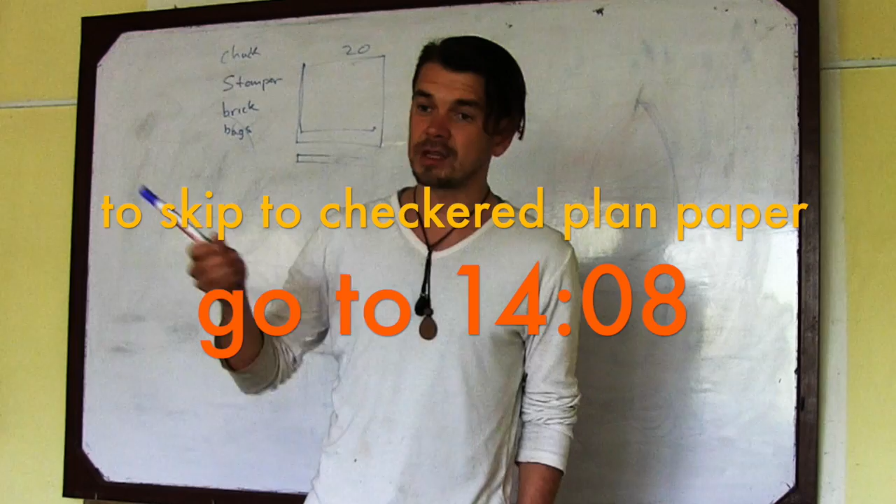So we're going to do some improvisation for the earthbag dome, which is going to have, so this is a front view, or the window, the round big window. It's 1.2 meter diameter. We're going to make it out of ferrocement. So it's going to be a cylinder.

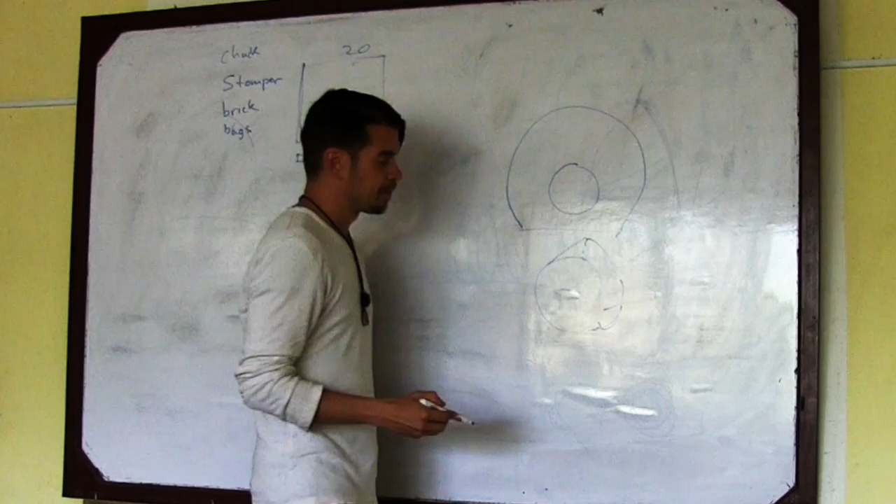Basically, we need to get mesh, and I'm going to draw the exact what I need, and let's see what we can find. So it's a mesh with squares of about, yeah, it comes in a huge size, probably the size of this wall. So if we could get one of those pieces, the thickness of this is about 5 millimeters, but I'm happy with what you can find.

The key message here is that we're able to make a circle out of it. So about 60 centimeters, and you'll use the rest of the offcuts. Once you learn ferrocement, you can.

Just hang on one moment. This big piece to bring here. Maybe they can cut it. It's very light, I think. No, it's not heavy, 2 people. It's big, but 2 people.

But it might be better to cut it into 2 pieces. Would that be enough? So what I need is a 60 centimeter piece by 4 meters. This is what I need for this job.

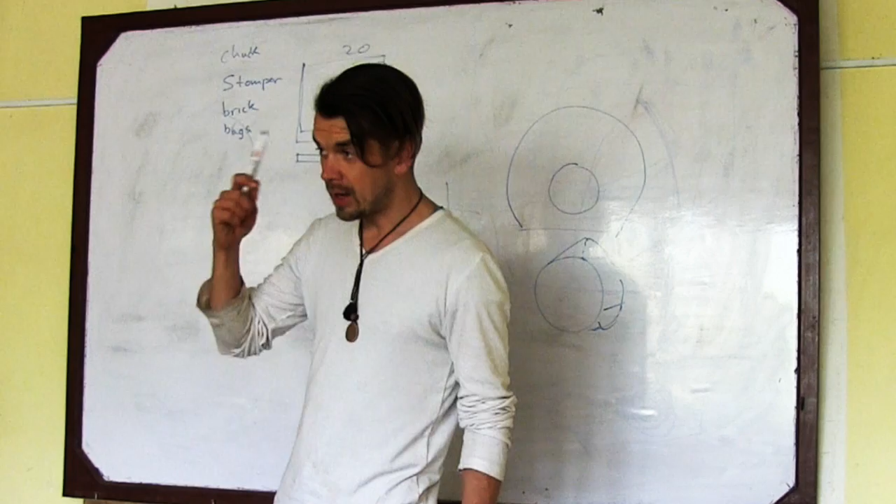But if we plan it carefully, let me tell you why. So squares could be a little bit smaller, but it's not a small thing. It's the one that you drop into the floor to make the floor not crack. So you have plenty. Your metal work is exceptional just from driving past and seeing how people are building. It's a stock standard material.

So we're going to take this mesh, we're going to make it into a circle, then we're going to take your small squares from your drying boards apart, if that's what you want to do, otherwise we need to buy it. I think those trays are great. I would recommend not taking them apart, but if you're not using them, let's take them apart. But those trays are great. That's your dehydrator, but you know what you need.

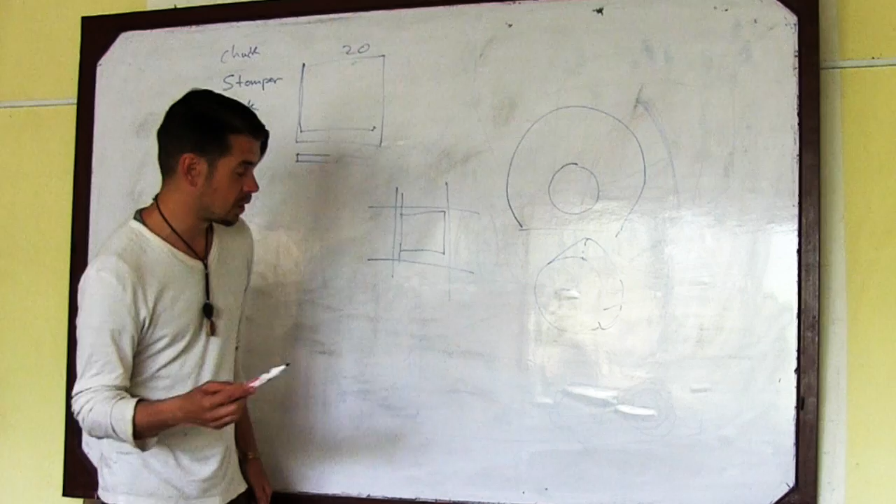But I need that other mesh as well, so we're going to flatten it, because it's 1.2 meter diameter times 3.14 pi, which gives us 3.7. So we need an overlap, probably like half a meter overlap. So 4.2 by... and you always wonder how wide.

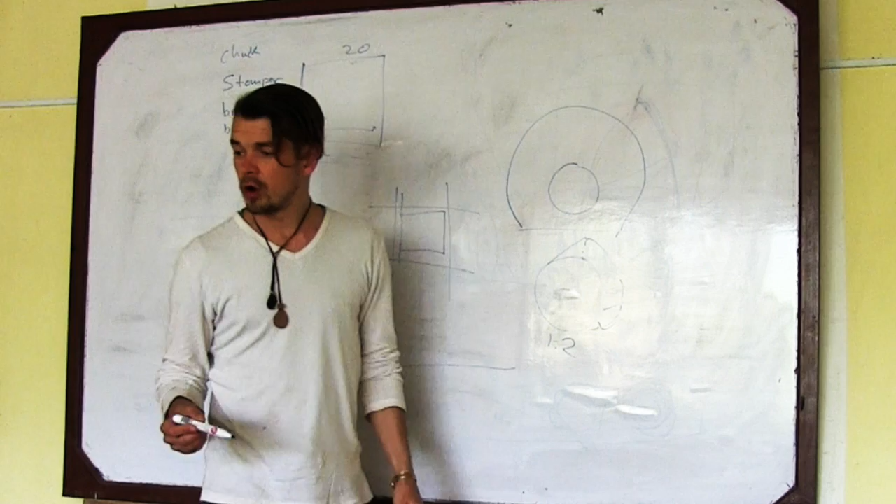The key message here is that we don't have this because we have the brick line. The key message is that we don't have this thing stopping there. We need this thing to go a little bit out here and out there. So I think it will be fine, but we need to check on checkered paper, which we'll do just now. But 60 should be good.

You can line it. I don't know if you've seen those Thailand dome pictures, the orange dome pictures. The guy's lying in the window. Steve Areen, yeah, he's lying in that window playing a guitar. It's a very cool feature.

Okay, so we're going to take it flat, that mesh. Then we're going to take your small mesh, the 1 centimeter. We're going to put it here, and another one on the outside. And we're going to stitch it with lots of little wires.

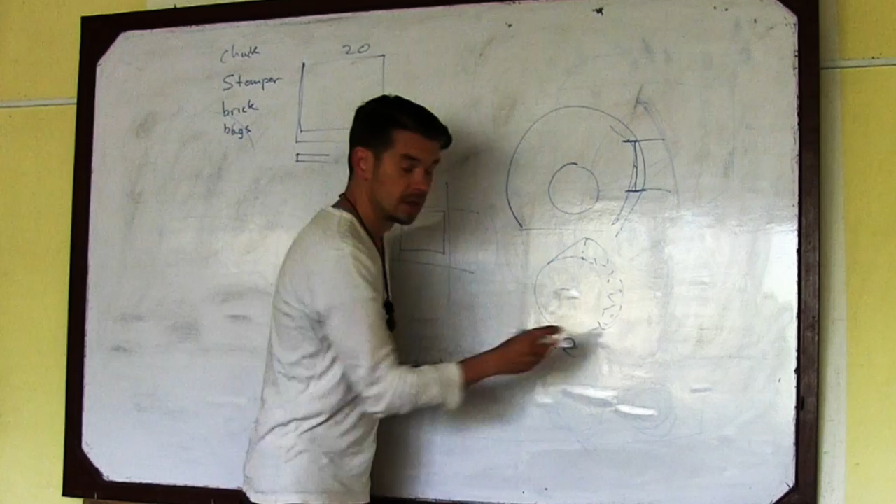Tie wires, so pliers, tie wire. So 2 millimeter tie wire, your standard tie wire. Not thin, and not thick like your barbed wire. No, nice tie wire. Okay.

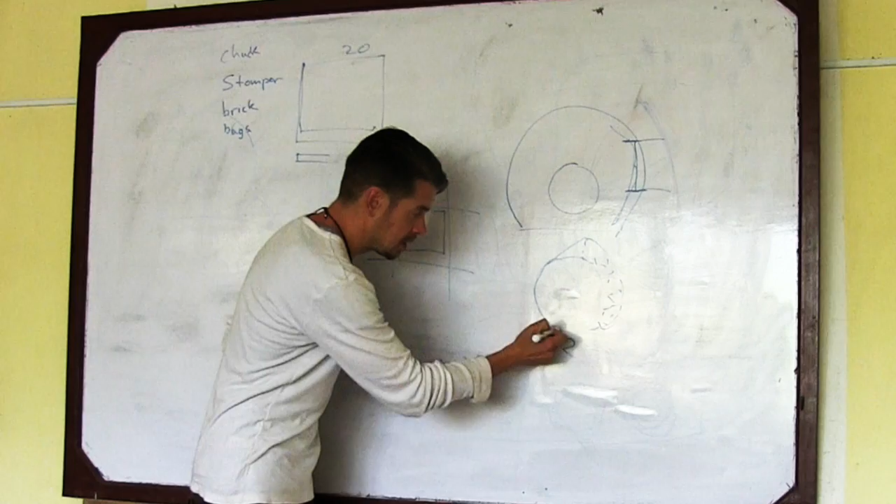So we'll stitch it all over, and we'll bend it in a circle, and then we're going to use your rebar, which I identified you have a pile of. There's a rebar that's not thick, but it's just almost thinner than my pinky a little bit. It's lying there. So we're going to use that as a ring here, and on the back side we're going to use it as well. So side view would be rebar.

And then this mesh. So we'll bend the mesh, and then we'll just reinforce it with rebar. And then what came to me yesterday by the river is we just have like 3 tie wires just to give it bracing, so that thing doesn't, because you're finding like the forms are going forward and back, forward and back.

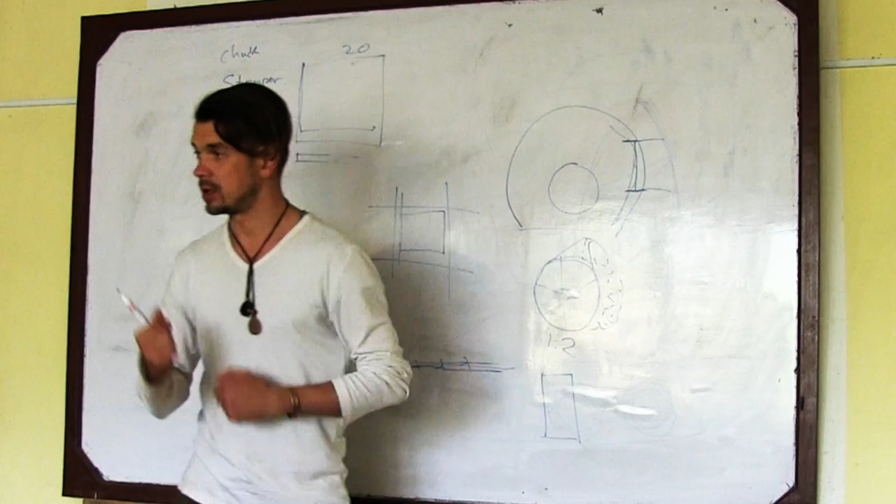As soon as we put the plywood, it's like sturdy. So this bracing is going to help it not go into an oval, not to flop. It will go like, because the wire doesn't let it go. So that will allow us then to plaster it with our plastering skills.

We have a professional plasterer. So we'll all go at it and make a nice strong mix, like 1 to 2, 1 part cement, 2 sand, and it'll be a ferro cement mix. Nice ferro cement mix. So if all goes well, which it should, in 3 days time, this thing will be like, it will be a rock.

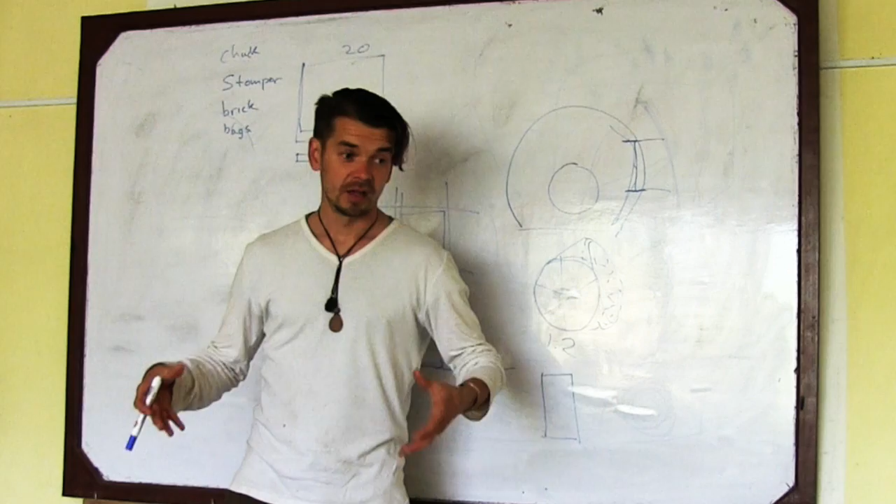We're going to gently pick it up with 4 or 5 people, and we're going to place it in the brick line. There's going to be our bricks.

We're going to take a saw and cut it out here, then put some bricks. We need some concrete blocks or something lying around to support this. Let me show you the side view. Say that's our dome - we're going to put something here, and rest this cylinder on that, because it can't stand on aircrete by itself until the aircrete is fully completed.

We'll do that with cloth and everything, but we'll come across that when we do it. I'd like to build that today, and plaster it today. So whenever it arrives, let's take a trip to the shop.

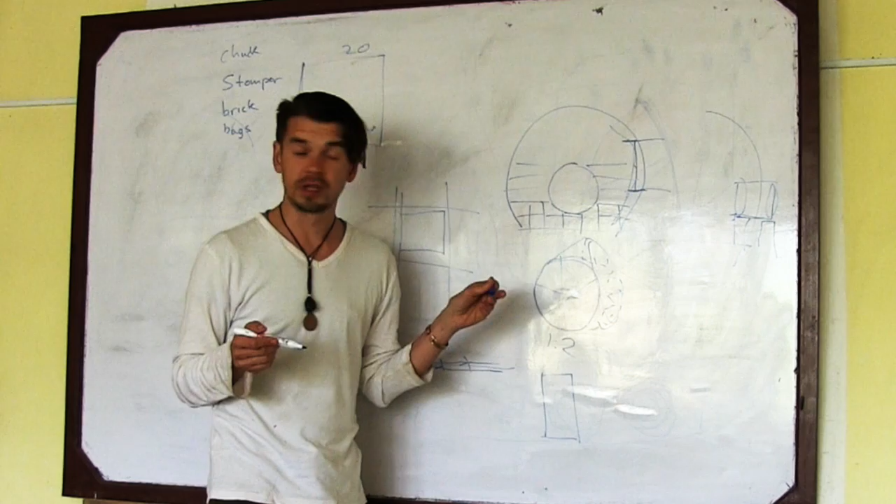Something else occurred to me - we have a tunnel here, and we have an aircrete dome, a sandbag dome here. It occurred to me that we shouldn't make this one form, because it's just so big and it's going to use so much wood. But we do need a form - we need a form here, and we need a form here.

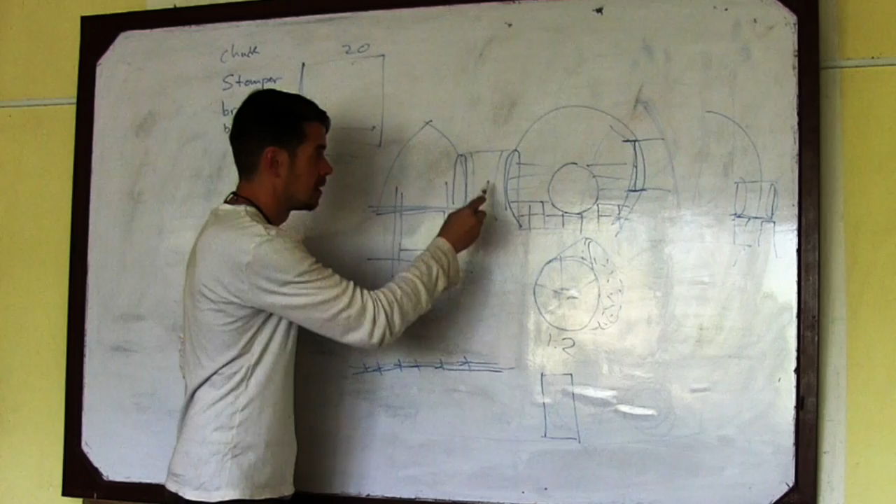So when we build our aircrete and the sandbag, we go around this form. The form can stop here, and we don't have to have it in the middle, but we definitely need to have it where the domes get a door cut through. So that means more plywood.

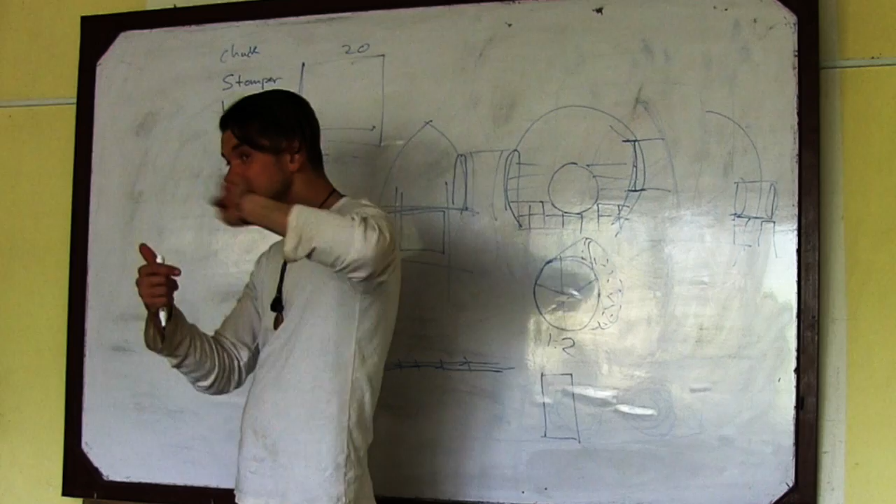What size? We need another 4 boards, and we need some rotten wood that we've been recycling. Can you get that wood in the shop? Like 5 by 2 centimeters. How much? In total, how much? We'll need to just plan it - we'll draw it quickly on checkered paper and plan it.

There's more wood from the light wood, from the forms you used yesterday. There's more in the tool shed. Okay, let's have a look. Yeah, that could work - different size, I think that's better. It's more like the termite-eaten wood that you used.

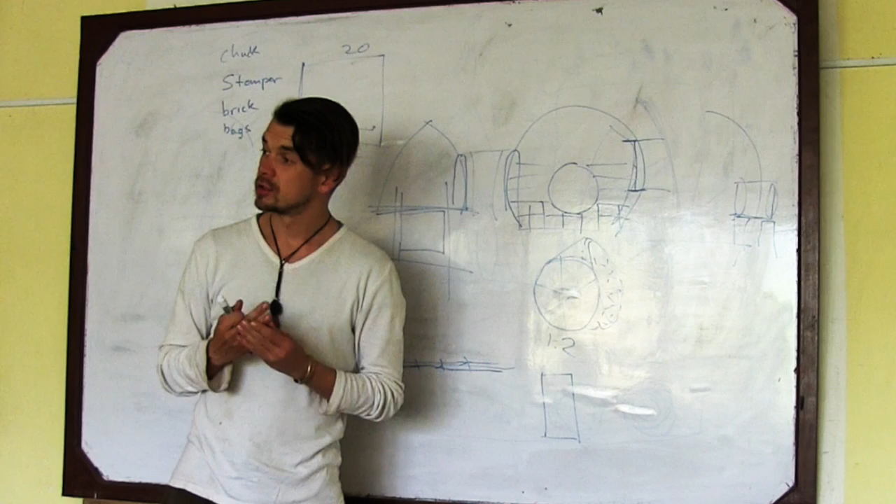Okay, and also did you check the reinforcement material once - the white fabric stuff? Did you check it? No, I haven't yet. Please, let's do it today, let's do it right now, after the... Okay.

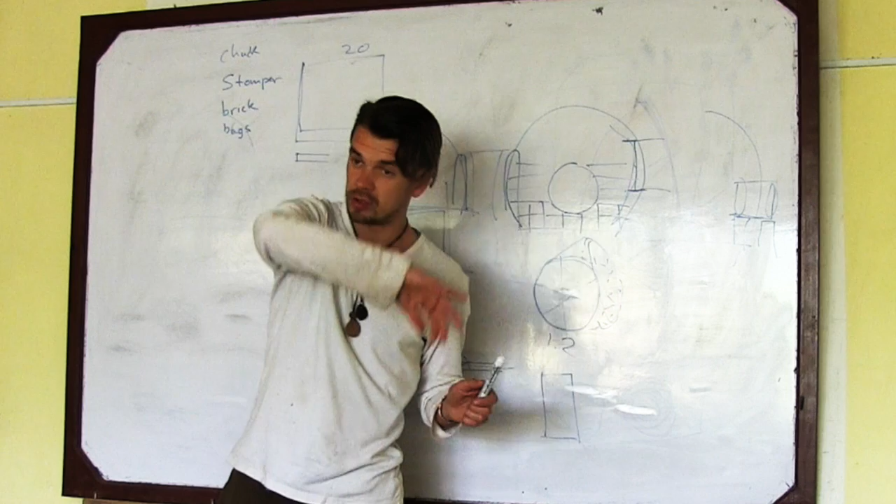So basically, once we get these 2 forms and the window, we have all the forms we need except for our big arch. There's 2 choices we can go with for the arch - the bender choice, with the plywood here and there, and beams between the 2 bends, or we can make it again with ferro cement. But what's our story on the bender?

We're waiting for the chuck to come. Just the chuck. Yeah, good. And we pray to the Lord that the chuck opens wide enough to take the bender stick. The Lord is big, and the chuck will be big. Okay.

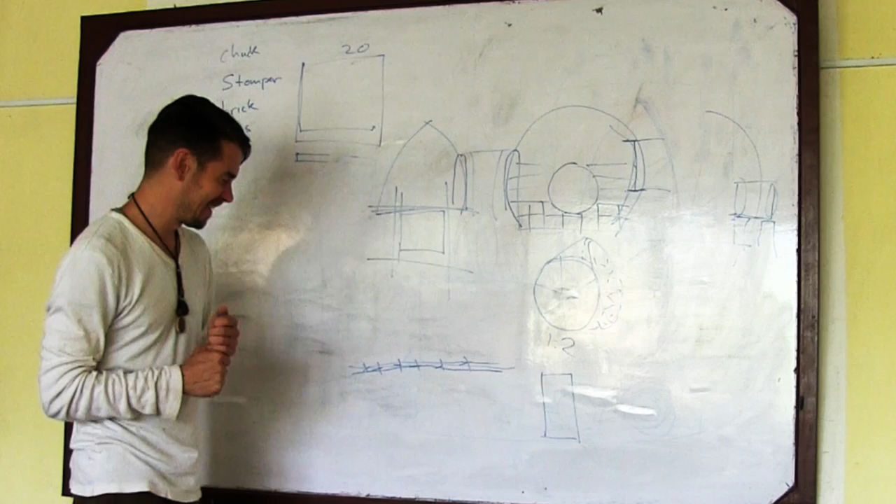Alright, so then it just leaves us with one form - this one. So we do 1, 2, 3 if possible today. Whoever hasn't had a chance at building forms can give it a bash, so we can rotate. We made a really nice form yesterday. And the rest of the stuff I can brief you on site.

So the question is, why can't we take a 3-meter dome and bash a huge door in it? As you can see, that's just unproportionately incorrect, so you've got to feel it out. The 3-meter dome, the windows are not going to be bigger than this.

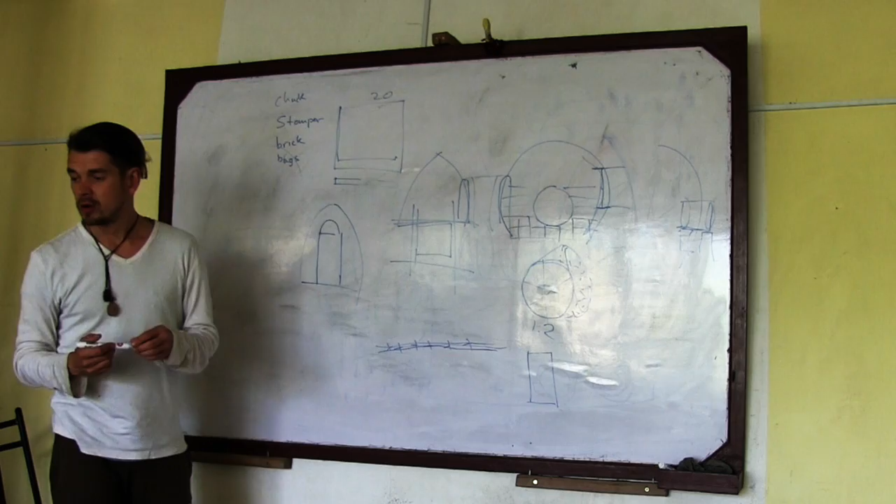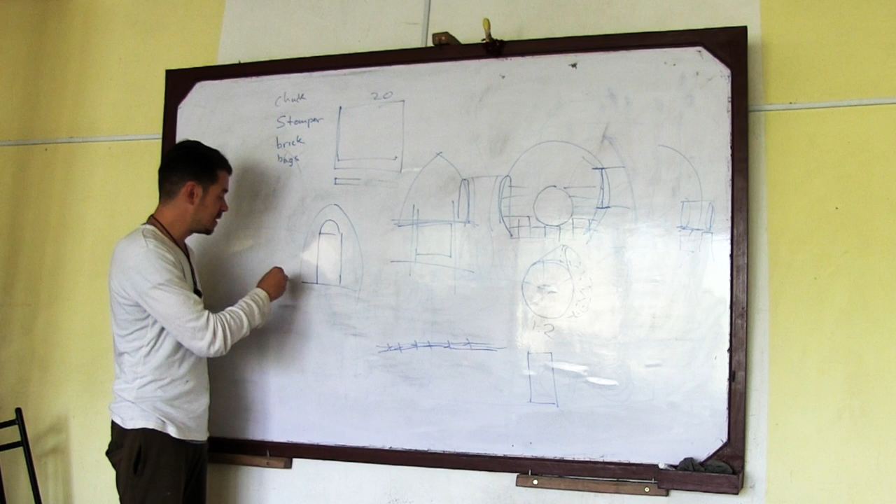I'm even worried a bit about the huge frame we made there, because by the time we put the side sticks and applied it, it came out too big. But we'll make it work, even if we have to make it smaller, or use it in an aircrete dome for example. But if you have a 5-meter dome, which is 5 meters high, then doing a door this size is more proportionate - that works.

With aircrete we can get away with huge openings, because the brick is so light. The sandbags are very heavy - you saw, like 3 buckets, you can't lift it. That dome is going to use 1,000 buckets, it's just too heavy. So that's why we've got these sturdy, smaller window frames.

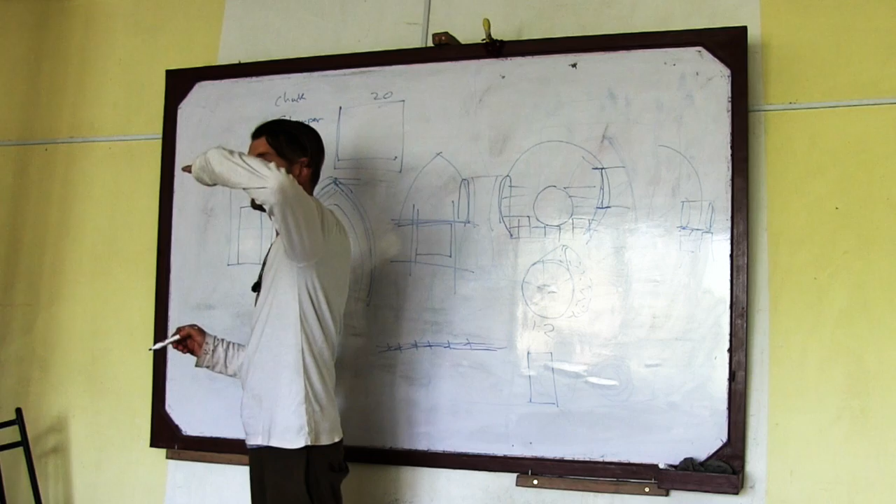In terms of the plywood, why I said 4, because it comes in 2.4 meters. So we'll be able to cut this shape, which is going to be 1.8 by 80. So if it's 80, then it's 40 high, the radius. So this part will be 40. So if it's 40, we want the door 1.9, so Frank can get in. Minus 40 is 1.5, so this is going to be 1.5. So it will take 2 meters of board.

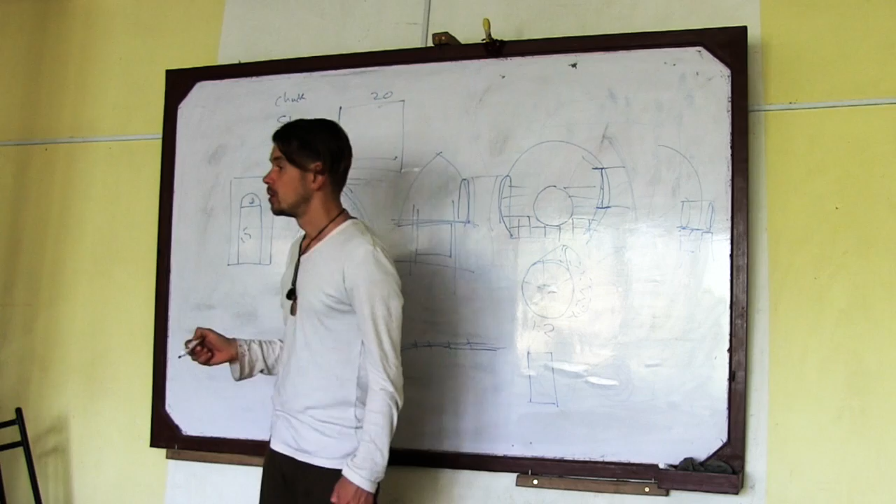And that 4 times. I think your boards are 2 meters, or what are they? They're all that size that I brought the day before. I think they were at 180. 180, yesterday you brought.

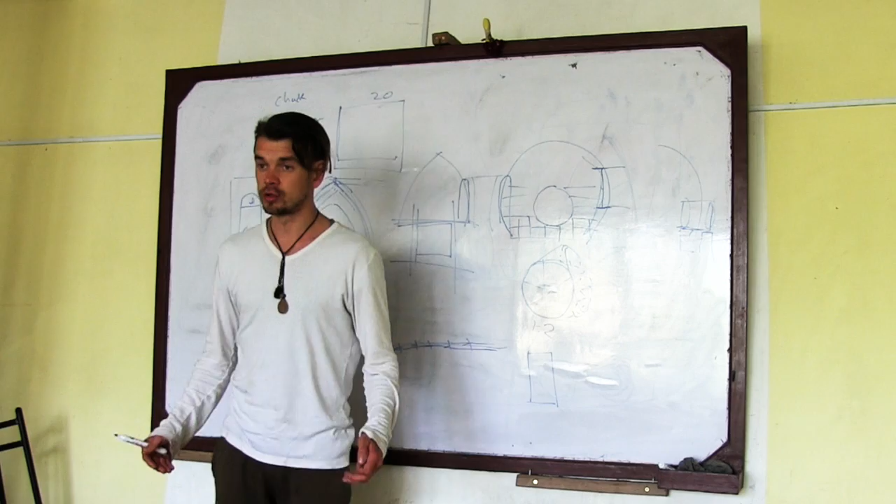If we got 180, we'll make it work. It's just Frank's height, but if we want to make it slightly higher, we put 4 bricks underneath, which we will anyway, because the way to take these forms out, you put bricks and wedges, and you kick the bricks out, and the form goes, otherwise there's all the pressure on the bag on top of it. So we need to check that we have enough thin plywood, and we need times 4 for this.

And that thickness of this, like the one I brought before? Or can that also be thin? Look, that 4 pieces, what Cara got us is amazing, if you want your forms to last. Yeah, but that is very heavy. Like that one I carried was half that size and super heavy from side to side.

And we need 4 people to carry them. And we need the mesh, so we need 6 people to go there and bring it. Wow, yes, that's it. It should be stable, of course, but I think then it's better we go to Domre again and buy it like you did yesterday. And then you have to understand that's a big issue for us, you know.

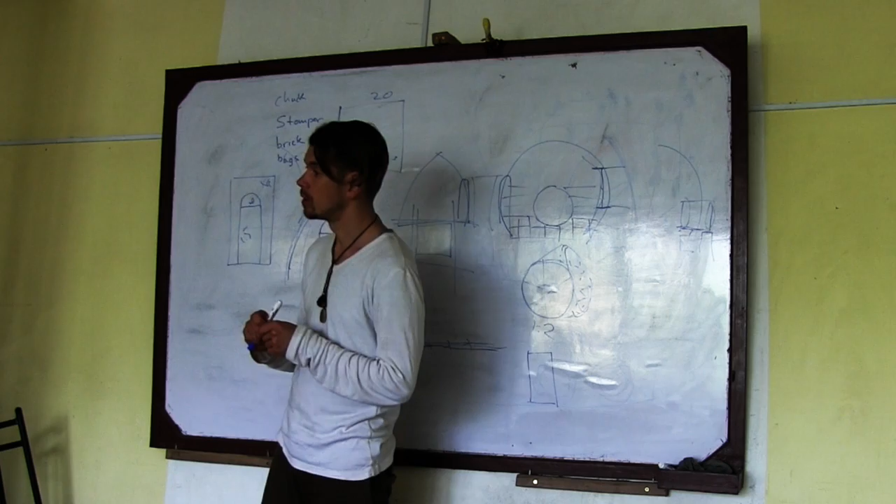Like yesterday we could get them also in one go. Now we have to drive again to Domre, have another Jeep, costs us 3,000 rupees. It's okay for now, but plan a little bit, so if we need more, we take everything today from Domre. Because we again have a Jeep, we can load it, but we need to plan this a little bit better. It's half-day work, it's a lot of rupees, so... Yeah, I hear you.

This is the thinking. When I was designing the bottom 2 rows, I was designing it for 2 curves made out of steel bend, so I wasn't concerned about sizes, and that's why I've placed them at 252. Because our bender and that whole story hasn't happened yet, we're realizing that we're going to be making the box out of plywood, very similar to the style with these beams. So it's going to be a heavy box.

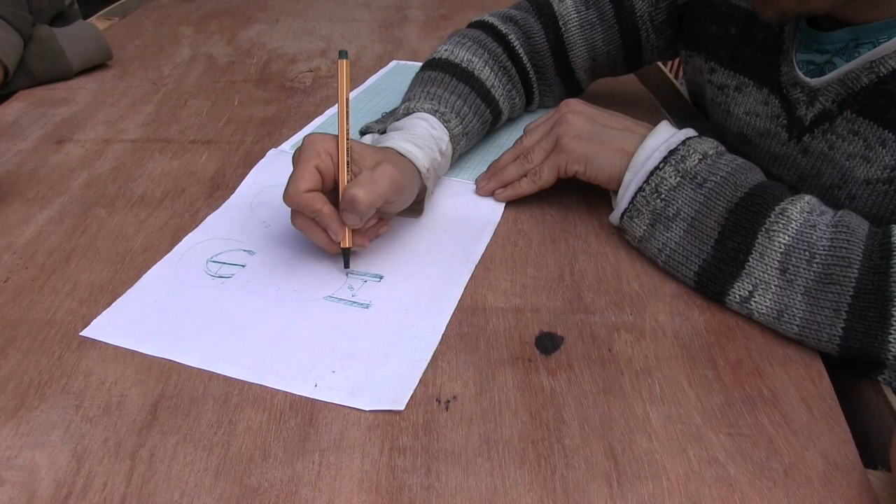So I'm recommending, and I'll leave it for you guys to discuss quickly whilst I run and get a compass, to build 2 extra bags, one here and one here, a bit closer. I know it's double work, but then we're able to use just the plywood, 2.4, it's 123. You know, worth having a little curve for a human being to enjoy a cup of tea.

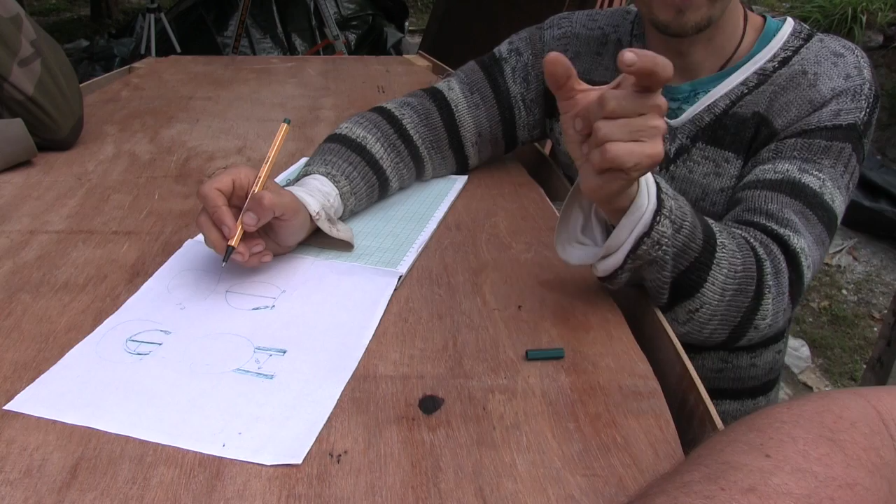To build these 2 little bags that we can just have these plywoods, and we'll still have a little wooden beam in between the 2, because there'll be 2 separate forms. We'll still have a little wooden beam this size between the 2 that we can kick out. The forms come in, we'll kick out the wedges, so the forms drop down. They come in and drop down by 3.5 centimeters, which should be enough for it to be smaller, and we just can take them out more easily, yeah, because this stuff is heavy.

And then aircrete bricks are going to do that on the outside. First we're going to oil them with oil, some sunflower oil, then we're going to put the cloth, geotextile.

Okay, so just decide that. I'll quickly run and get a compass and a ruler, and we can do a proper design thing for this house and do it together. Okay, so we can switch recording.

Okay, so guys, the first thing to decide is the scale. We want to go as big as we can on paper, but keep it manageable, maybe let's try 1 to 2.

So we've got a 4.2 meter dome, inside foundation. So it's 4.7 full. Plus we have a 1.6 tunnel. Plus we have a 3 meter inside, so 3.5 sandbag dome. So we've got 3.5 plus 1.6, 5.1 plus 4.7 is 9.8.

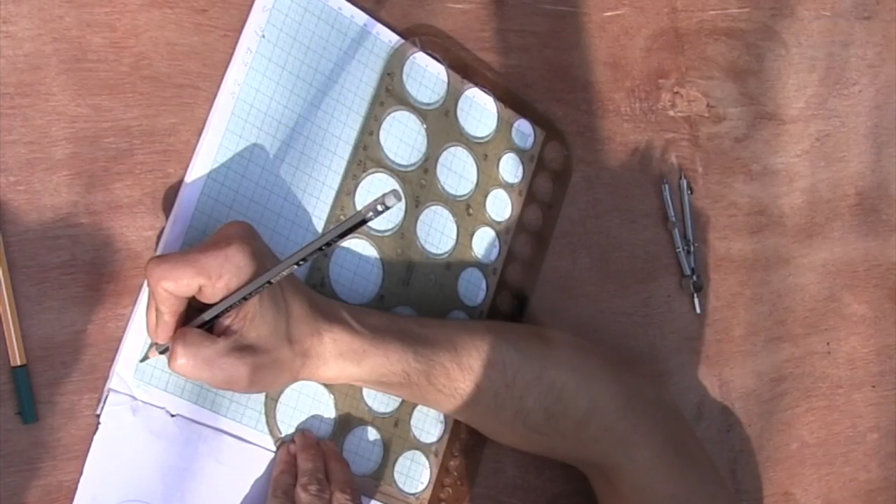The question is, do we go 9.8 and make that same tiny little thing I did the other day, or do we double it? On this paper we can't double it because it's 20. Okay, so then you draw the scale on the side: 2 blocks equals 1 meter. Okay, now we draw it up.

So when you're drawing it up, you want to be able to, if all goes well, draw full foundation circles here and draw a side view here, right on the same paper. Why not start with the side view? We can, good idea, because it's straight.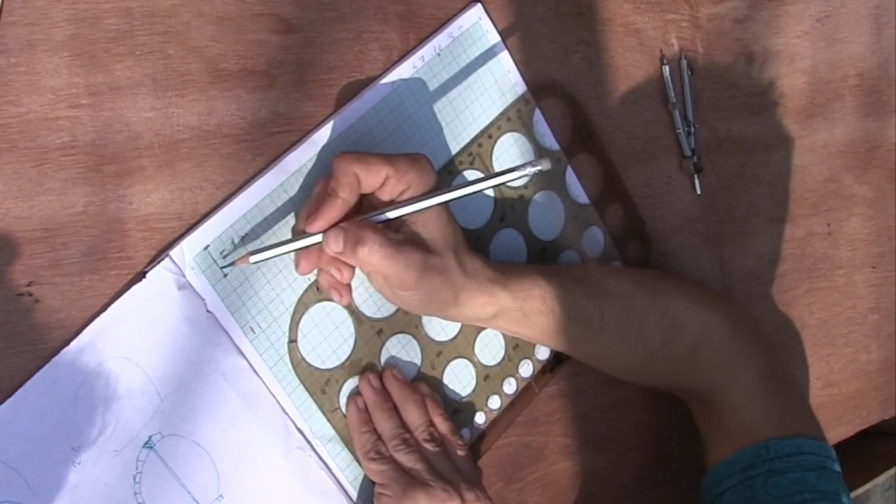So let's first draw the lines. We have a 4.2, plus the bag is 25 centimeters, so it's half a meter. So that's our bag. 1, 2, 3, 4, 4.2 plus another 5 millimeters for the bag. Does everybody understand why 5 millimeters is the bag? This is 1 meter, this is half a meter, this is 25 centimeters. Okay, so that's our concrete dome.

Then we've got a 1.6 meter tunnel, so it's 3.2. Does it make sense? Yeah. Then we have a 3.5 meter dome with a 25, 4.2 meters.

Sorry, eraser. Oh, you got one. Got you. Well pointed. Okay, so double everything up. 4.2, so it's 8.4. Well spotted. Okay, then we've got 25 centimeter foundation.

Then we've got 25 centimeter foundation. Then we've got a 1.6 meter tunnel, which is 3.2. Then we have a 25 centimeter foundation. Frank, are you still with me? Mm-hmm. And then we have a 3.5 meter dome, which is 7. Now you have 7.5, sorry, 7. So we've got 7. And we have a half meter foundation.

Then we have a compass that's a certain distance away from foundation. Could you go and measure how far it is from the bag? You remember the stick that we stuck in that gives us the reference for the sandbag? The metal thing was a chain standing in the tunnel. Can you go and measure how far it is from the outside edge of the bag? Then we have a real life.

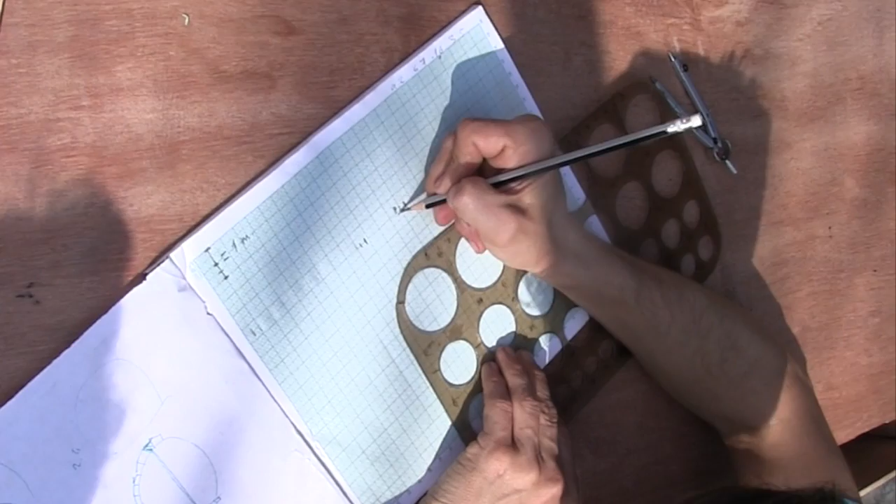How far is it from the sandbag, from the outside of the sandbag, this way. Do you want me to quickly run and check? Is this it, outside? Are you confused? So times 2, 30, so 6 millimeters.

Okay. All right, then we placed it a bit high. You remember we placed it a bit high, I think it's about 30 centimeters. Does everybody understand that that distance is where the house will go straight without curvature? The sandbag house, okay yeah, this is why.

And that's another thing we need to check, the compass is coming apart. German quality, it's definitely German quality. Helix.

Then it's working. Okay, so I'm going to just drop down everything a little bit. Okay, so that's the curve of the dome.

6 millimeters from the outside of the bag, I gotta do the same thing. Does it make sense? What I do here is what I do here. So there is 6. Let me just drop a line of where I started. So 6 millimeters to the foundation, yeah? Got that. Got it.

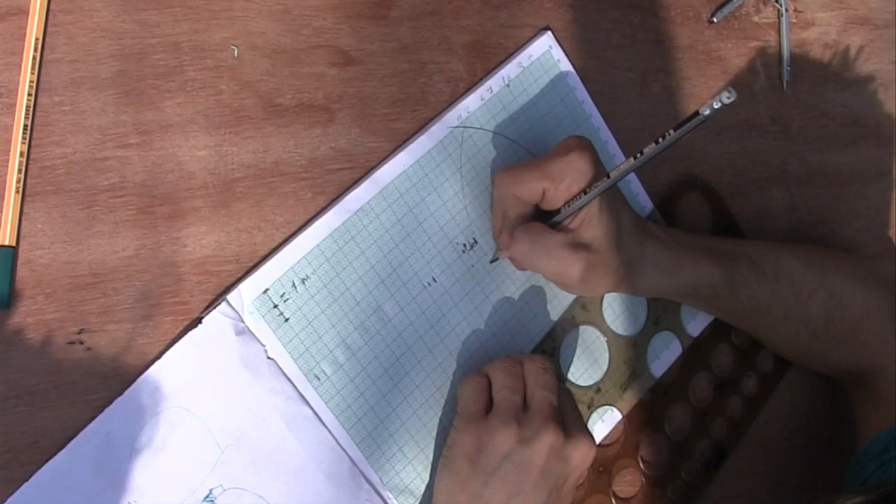Then we've got 6 millimeters going straight down. So this distance is where the bag is coming up straight. 6 millimeters straight down. And this is important design work, just because you were wondering, you didn't know how to draw floor plans. This is it.

Okay, then we have the thickness of the bag, so we can freehand here. You can use a compass, but just for the sake of time, I'm just going to freehand, more or less 5 millimeters. Is everybody still with me? Yeah, I'm here. Are you getting it? He's all over it. Okay, then we've got a thing going here, so straight up, and then it starts curving.

And this is when you plan your skylights and windows and all the story. So this is what we're gonna have as a house. So this is our floor.

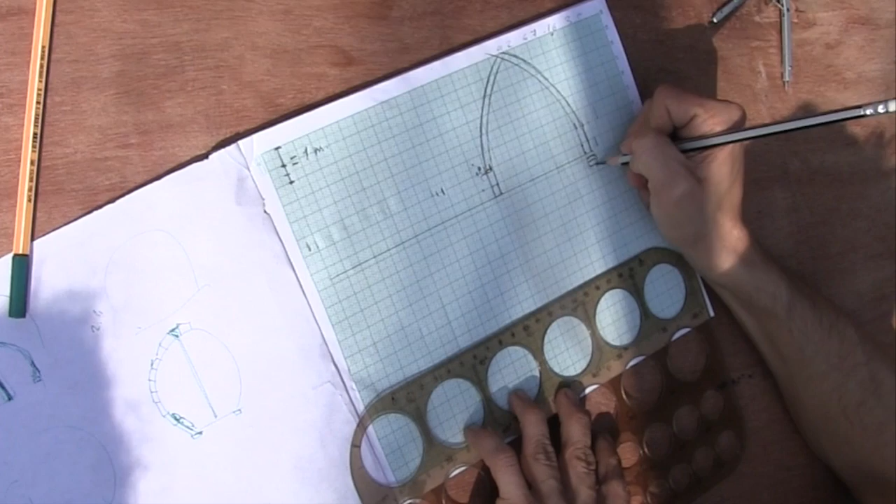And obviously the foundation goes below that level, which we still have a few rows of, I think three rows of sandbags. The bottom two bags get wrapped in plastic and overlapped here, and then this bag gets completely covered in plastic. It's all in the course, just a reminder. That stops any water from going up.

Okay, then we have our tunnel. We want it how high? 1.8 meters high. Are we comfortable that from the floor, like 1.8 is good? That means super tall people will need to lean in. Okay, so it's 3.6.

3.6 is our tunnel height. Why not making it bigger? We could do 2 meters, I think 2 meters makes sense, but it's huge. Okay, let's go with 1.9.

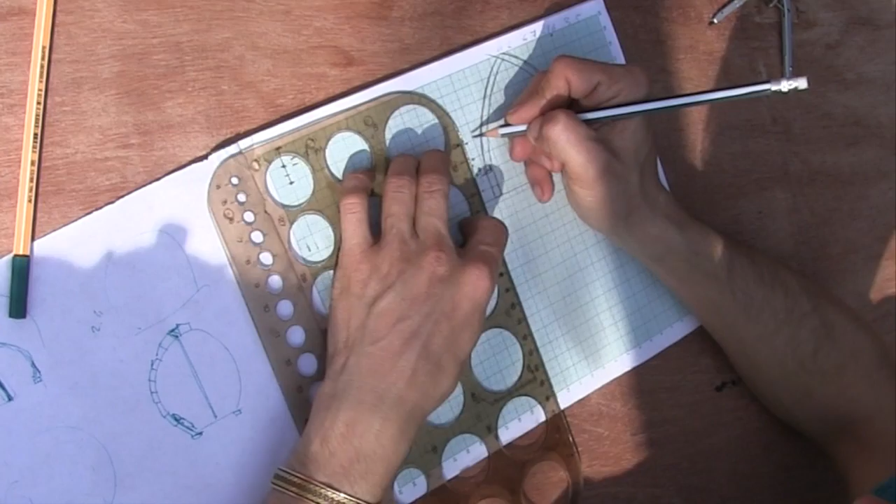3.8. There is a reason, I'm not just trying to be difficult. It's a very small dome. To make a huge door of 2 meters high for only a 3 meter dome... well, you don't really see the door, obviously, you're just running through from one to another. Okay, I'd make it 1.8. Let's just see what 1.8 looks like, and if we're still not happy with it, we can change it.

Okay, so 1.8 means 3.6 centimeters. Yes, everything is doubling, since we're on the scale, times by 2. 3.6. And why is this not 3.6? 3.6, there it is, okay.

Then let's draw the aircrete dome. The aircrete dome, we're gonna start at belly button level. Why not? A meter-ish, more or less. Frank, you might want to go to your belly button level if you're designing a home for you, but I'm assuming everybody is going to be as short as me.

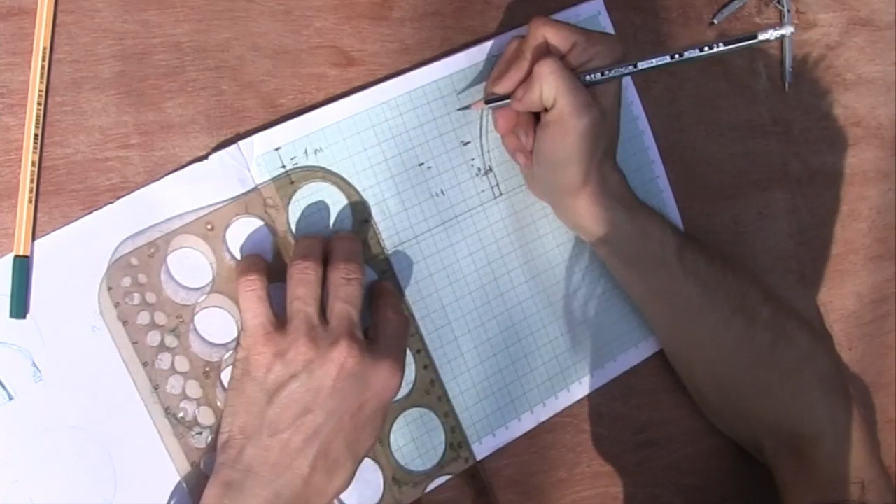Okay, so where's the center of this dome? The center of this dome would be between these two points. 2.1, 4.2 times 8.4 - 8.4, there it is. So 4.2 would be our center. Let's draw the center line.

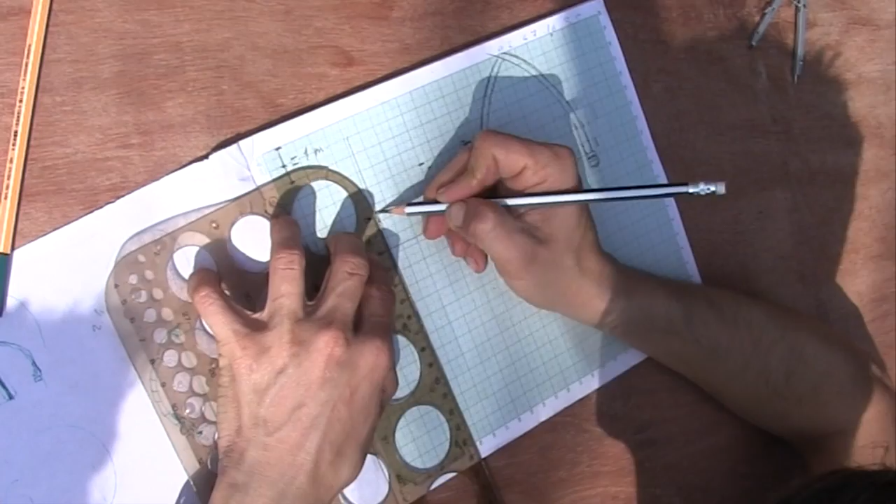Is this useful? Yeah, of course. Okay, this is our center, this is our 1 meter high. We're gonna draw the inside part of the foundation. This is not 1 meter - oh, this should be 2 meters. Look, there should be 2, so it's in the middle of this one. Yes, thank you, thank you - German quality. Okay.

4.2 is this line, we're still on it. So it's gonna puff out.

Okay, forget these two lines - these two lines are just showing us where the sandbag is. There it is, this is showing us where the sandbag is. We can still check where we're going to be placing it.

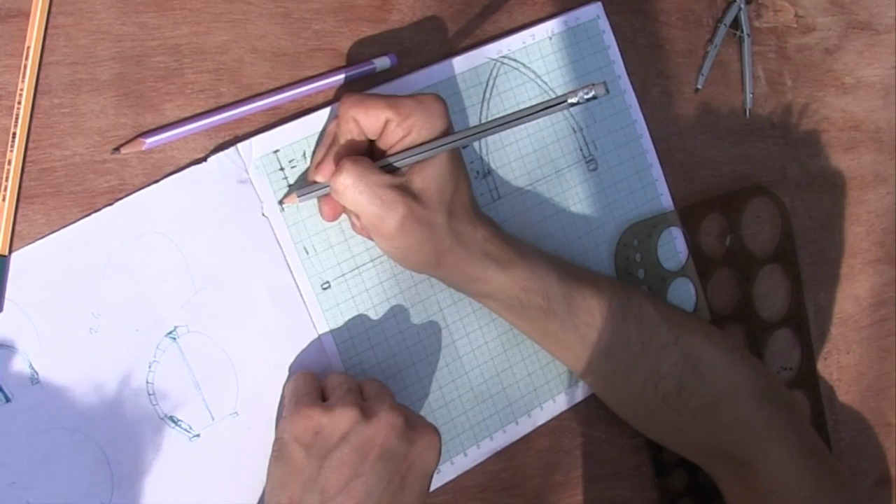The aircrete brick is 10 centimeters, meaning it's 2 millimeters on checkered paper. There's our aircrete brick, the thickness of it. Are we on the same page? Okay, so 2 millimeters, more or less, is our thickness of aircrete brick.

More or less, it's like, okay, so this is our aircrete dome. I mean, this one we need to recover. Yeah, so looking at already what I've drawn, it's slightly out, but what I'm trying to say is we're gonna place it more or less in the middle of the bag.

More or less, so it's probably gonna be slightly bigger, but the middle of the bag is where we start and we carry on from there. Boom, you know what I mean? Not too much on the edge, you can play a little bit. But also with these bricks, I think we can cut the last one so that it fits there.

We can, yeah, all the bricks we can cut. Not all the bricks, but yes. Okay, so this is the side view of our dome, and then we have a tunnel.

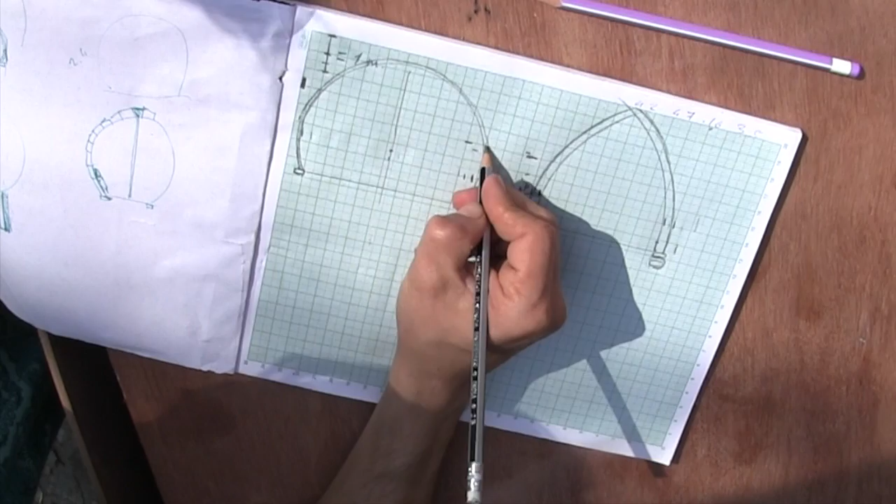And this is the box that we're planning right now, the two boxes we're planning right now. Let's draw the current front bags, this distance. Right now they're 2.5 meters, so they're 252 inside, 250 this way inside, and 250 that way, and they're 25 centimeters wide.

So our current bags are there - if you're standing in front of the house, oh sorry, and looking that way, yeah, so we've got the bag here.

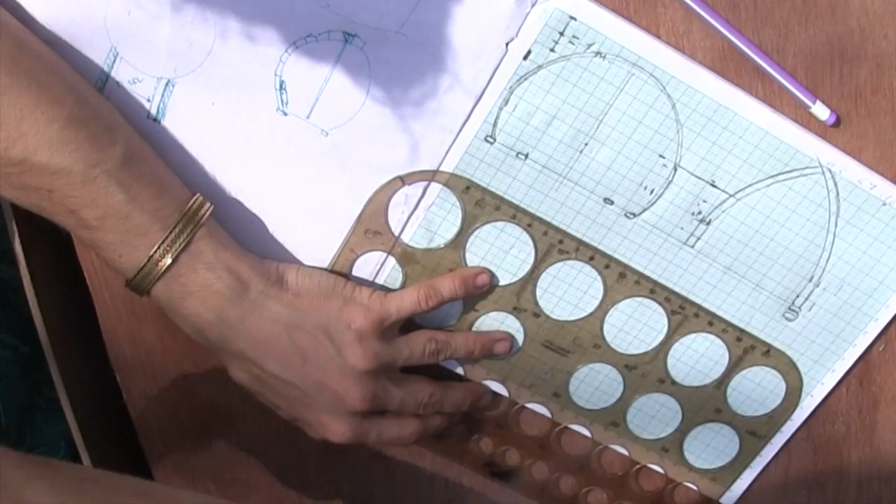Real life scenario, and you'd obviously do this before you plan your house, and then you're gonna have 10 times less problems. It's fine that we had problems, because if you hit these problems without me being here, you're not gonna know the answers. We're figuring it out together. So this is what we have right now - I'm recommending that we build another bag on the inside.

So we can use our 2.4 meter ply, let's just see. More or less, okay? Can we not just use this one here? Yeah, 1 meter high.

Okay, but the arch doesn't have to have the same geometry as the dome of 1 meter high. Yeah, this is good to know. Okay, the arch - what we really want to hit is we want to hit that.

But our wood is 2.4. Yes, but our wood is 152 high. Look, Frank, you don't need to do this. Sorry, 122. Our wood width is 122.

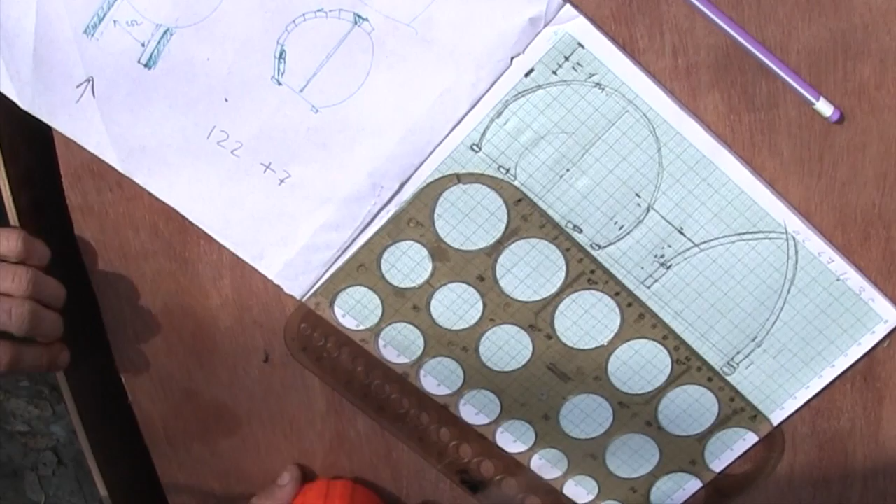Okay, centimeters. Plus, if we're going to be using these blocks, it's an extra 3.5 plus 3.5 is 7 centimeters because of these blocks. Yeah. Plus this wood itself, you know, the devil is in the details.

We are talking 130, yes, 5 millimeters, so it's plus another 1 centimeter. So we're talking 130, plus, if we're gonna be doing this wood block here in the middle, we're gonna add another 3.5.

133. So it's 2.6 - 2.6 is our limit, meters. So it's 2.6 here and 2.6 here is our limit that our wood allows us without making a whole box in the middle.

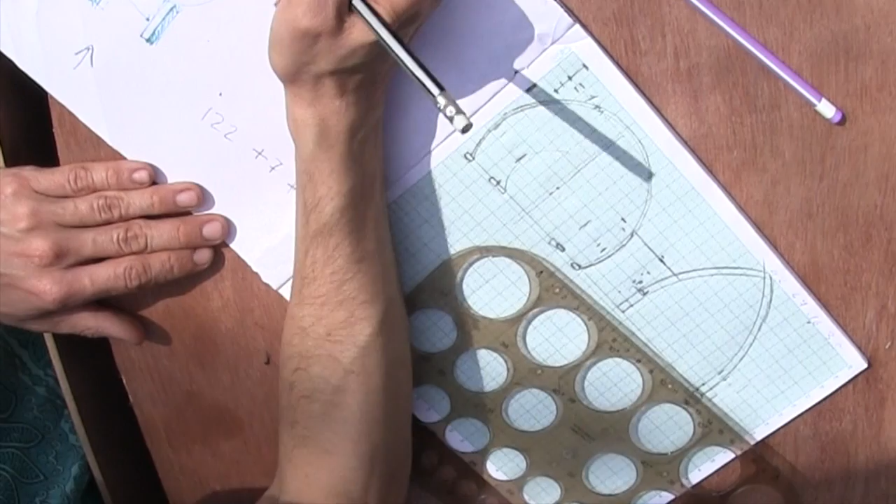Ask Frank how long this took - this is time. So we don't want to do this box in the middle. We want to have these two boxes and have a wedge that we can kick out of this thickness.

Okay, but we want to calculate the size of the two pieces outside. We want to calculate - we'll do that now. Okay, so this is our limit.

So we set it to our limit. We set it to our limit and we check. You see, we're just on the inside edge of this bag, of the current bag.

I'm just drawing a light line. We might redraw it, but I'm just showing you that's a possibility of the current window being that, and that's good. That's good. You've got - let's erase this line.

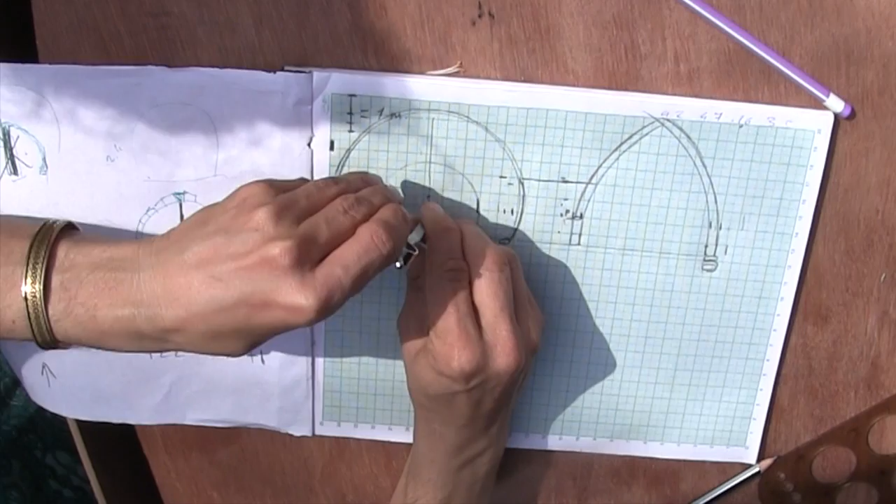Okay, so this has got a little bit of a lean for your back. So you just did that from also the same point? No, there's the point. You just did that randomly, the point, or? Yeah, I did it randomly.

Okay, and you can actually construct it a way that this circle kind of fits to the outer circle. No? You can, you can. I would do that because then it fits more to the whole.

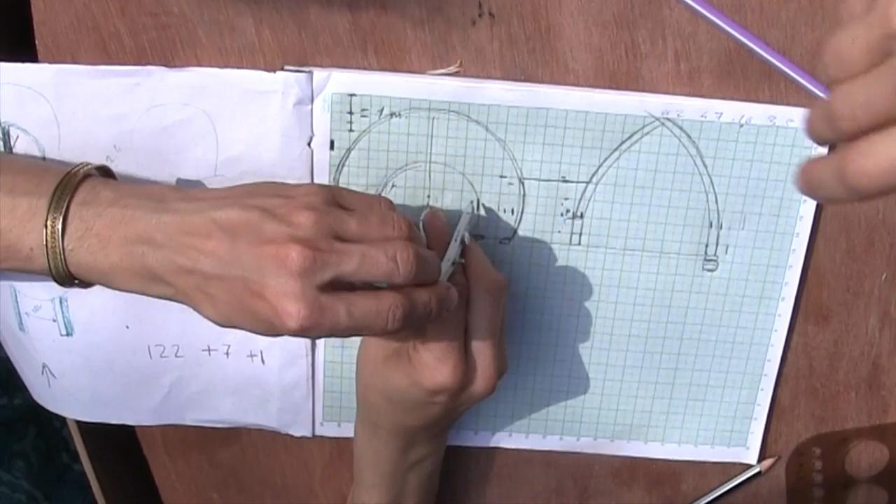Okay, that's what you're saying is lift it up higher. No, it's not what I'm saying. Okay, wait - before we do that, let's put our limitations. Our limitation is the height of the wood, which is 2.4. So, 4.8 - let's put our limitations of wood.

Okay. You also - okay, so you still have to put, also this is plywood, and then you still have this one come on top of it. Yeah, but you don't want to go too high, because you must remember - I'm just gonna draw a temporary. If you're talking about a box here, that's still okay.

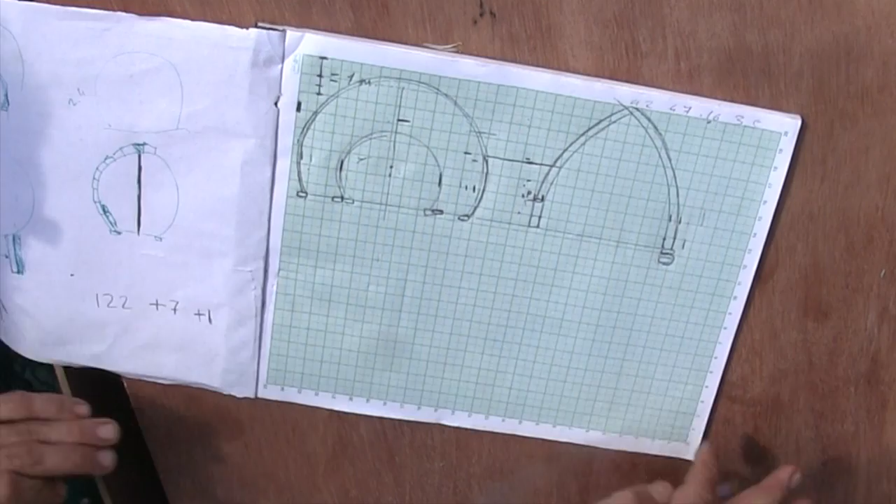We also could, just so you know, we could have a little leaning arch. We could have two leaning arches doing - I think the higher you go, the more it curves in the bottom.

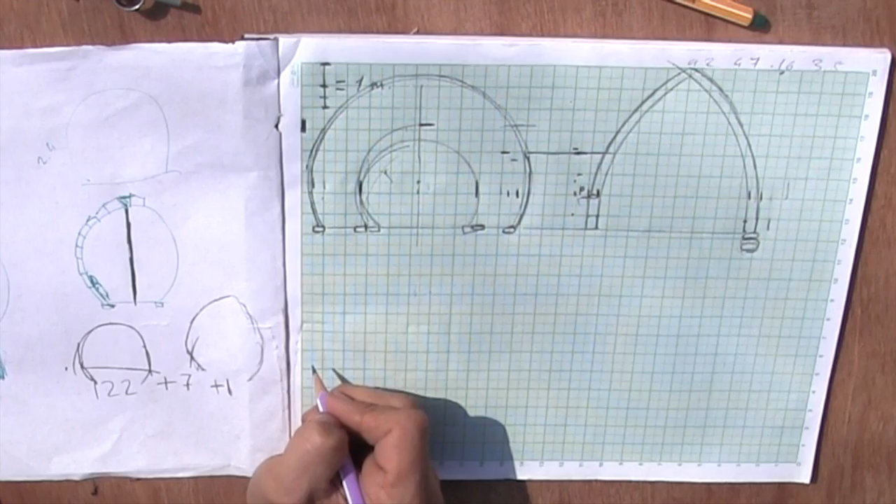Okay, so let me give you three options. You can have a window that's like this - it will curve in. You can have a window that does that, and it has a slight point, which will replicate and harmonize with the dome standing next to it, and it's very pretty. So you've got a round dome and a window that's slightly like - you've got a nice little, you know, you've got like a...

I think the round thing is nicer. So it'll still be wide, but it'll just have a little point on, you know. But lying will be not like reclining that much, no? No, we can still make it reclining. I'm just saying you'll have a thing here.

Pointed, yeah. Have you seen Hajaro's videos from Thailand? He's had interesting domes with these windows in a round dome. It looks quite cool.

So if I follow the geometry of the outer line, this thing comes in even more - can you see? Way too much more. So I would just maybe drop it a little bit. That's our limitation. Let me just erase all of it, it's just kind of messy.

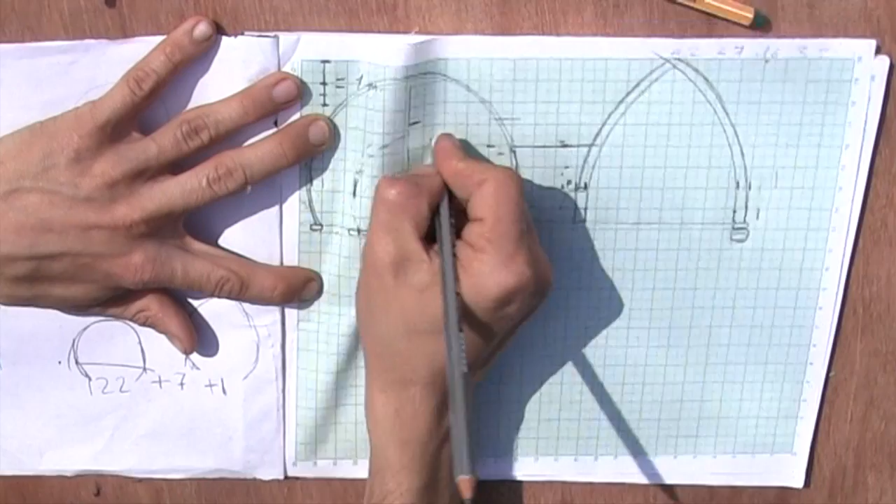Yeah, that's a dome.

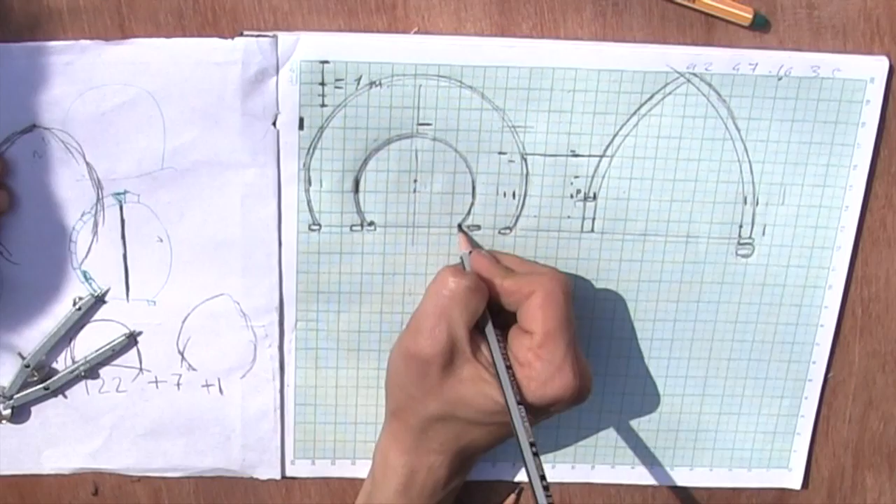So, limitations. Basically by the drawing of it, I can see if we're to fit this plywood as wide as we can, what that tells me right here is that that footing ain't gonna sit on this bag. It's a bummer, and I'm really sorry, that's just the way it is now. It's better we put another bag there.

Which will also be a good feature because we could sit on the side of the window outside. Well, you can't really sit unless you're in a bowing position to the sun, because you'll be sandwiched between the window and your body. But you could do a little brick thing here and fill it with soil and have little plants coming out around the window. That's also a possibility. So okay, this is our shape.

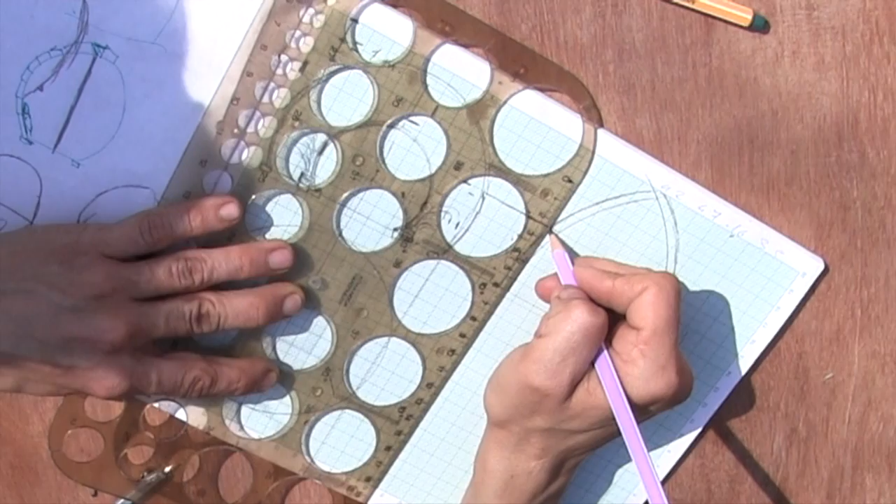That's our floor plan of the aircrete dome. Then we drop all the lines. That's our tunnel, our tunnel entrance to the other dome. This is the outside of the Sandbag Dome, and this is the inside of our Sandbag Dome.

Do you also do the planning sometimes on your PC or laptop? Yeah, that'll be amazing, that's the next level, but it all starts with paper. Don't underestimate the power of paper, because otherwise you're going to muck about sketching in AutoCAD. You just do it on paper, and if you want more professional, by all means.

Okay, so our tunnel is 80 centimeters wide. So now you're doing the top view. We know that our tunnel is 80 centimeters wide because we just measured it. So it's 8 this way and 8 this way, 1.6.

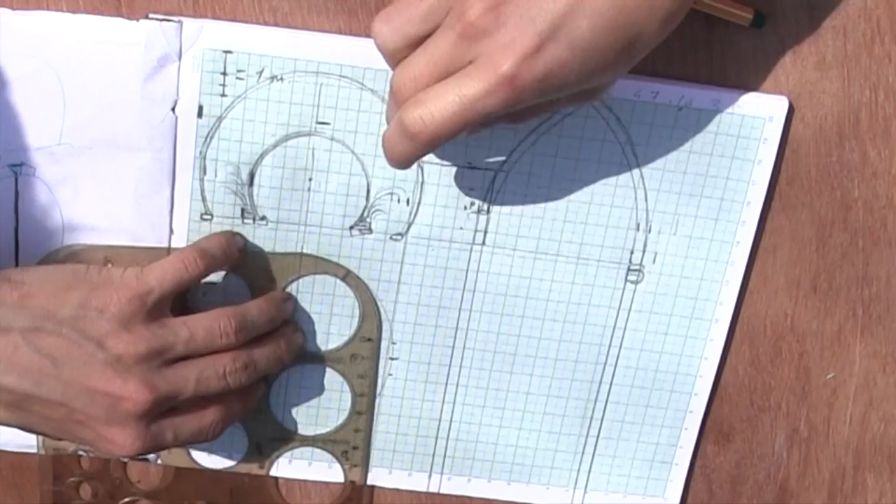But still, also the plus the width of a bag, the width of your bricks should be measured. Well, this is not even the bricks, our aircrete dome. Our aircrete dome will puff out.

Sorry, this is the wrong line. This is the outside of the aircrete. The sandbags, your floor, if you're drawing the floor plan of the couch, your floor is here. Does it make sense? You're planning your couch because that is what the width is at the belly button level. So your floor, in terms of floor space, is here.

Okay, more or less, but yeah. So that's where you can do your little couch, and you can do little super adobe things here, or little bricks. You can do your little rocket stove. You can plan your tables, and I like, you know, you can make really cool little teardrop tables, and don't be afraid, because this is just plywood and jigsaw.

That table, you can do your kitchen sink, a little clay urn that can go in there. Then you plan your plumbing that can go out, so you need to accommodate for a pipe, but aircrete is so light you can just take a 50mm attachment on a drill and go boom.

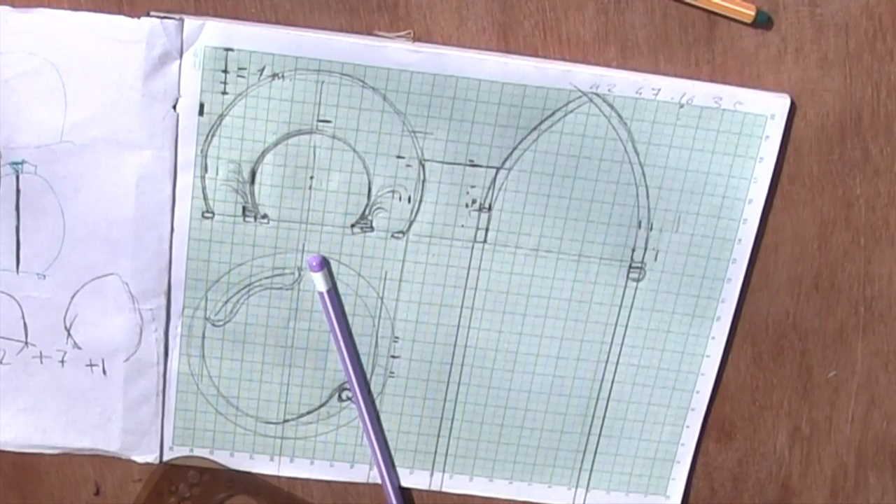But sandbags, yes, it takes 50 times longer to bash out with rebar versus just like we're doing now, a little pipe. And you'll see it in the course, the bag runs, you put a little 50mm pipe, the next bag will just go over that, take 2 seconds. To bash this out is a whole story, but we don't have plumbing to deal with, just touching on that, and it's all in the course.

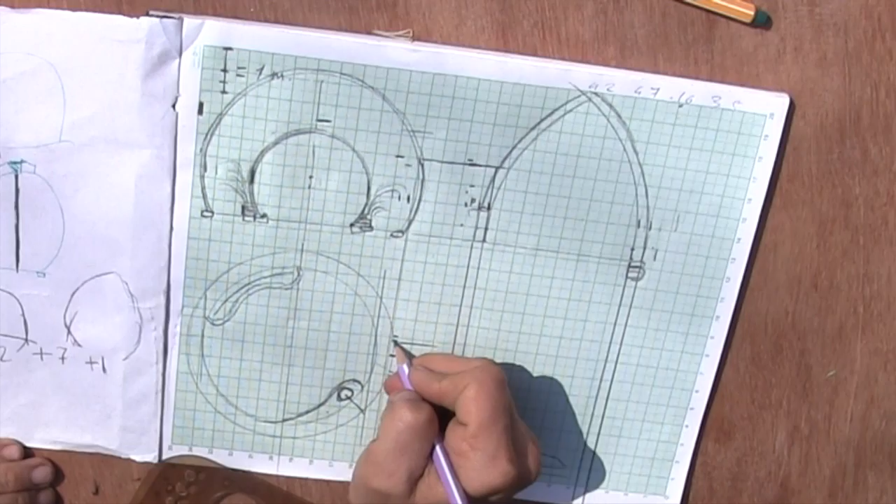Okay, so let's do it. The tunnel runs, why'd I have 2 lines? I already forgot, the thickness of the bag? No, the bag is a bit thicker than that. The bag is, oh yeah, it's 25mm. Yeah, you're right.

Okay, and then we have our Sandbag Dome, which is on this line. Floor plan would be here. Outside of the dome would be here.

Okay, so let's plan this box. Now the big question always comes: how big do I make the box? You don't want to make it too big, but you want optimal material use, keeping in mind that this is 1.22 wide. So at 61, you can get 2 boxes from 1 ply. I'm talking about the outer ply, the forming ply.

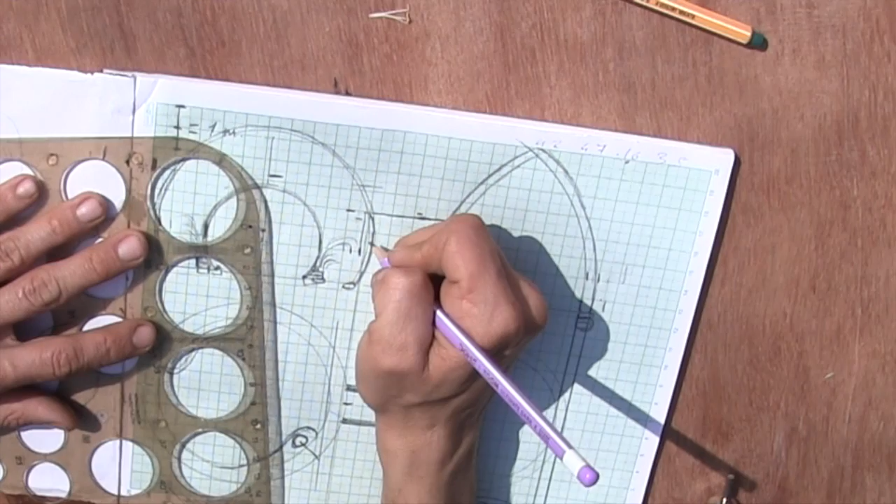So do you agree with that? In the optimal way, you would have made the boxes already at the beginning before you even start, and then you can just build the sandbags. We took the box in the first week, we just had the boxes made, and a little bit of the height on the Sandbag Dome. The second week was the aircrete dome. Once the boxes were made, this aircrete dome went up in 5 days. The whole thing.

It's blocks this size, you're stacking them, boom, boom, boom, going 2-3 rows a day. Fast. The forms take time, so you've got a good investment here.

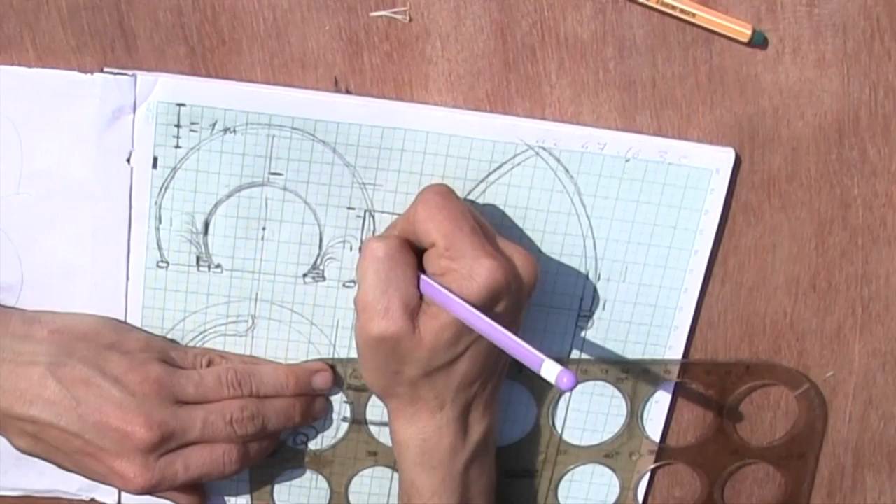Okay, so basically the question is how big do we make the box? That's always the question. So if we make this box, and we want to plan for the future, basically you want to go on the outside of this with a little bit of space, and on the inside with a little bit of space. And you can see by looking at that, the box can be 40 centimeters.

Let's double check. We'll drop down on the inner inside edge, which is here, plus a little bit of space. Don't worry about this little gap, it will still be fine. Plus you want to go from the outer edge plus an extra - because five blocks here is 25, so one block is 5 centimeters. So you've got an extra 5, give yourself maybe an extra 10 centimeters. Basically what it should do is support the line of the sandbags, the sacks, and the aircrete bricks.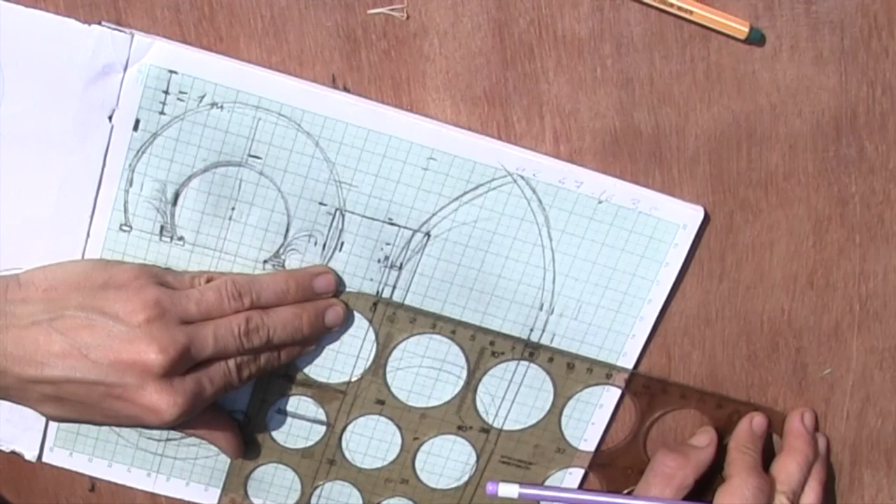And it should be in the middle. I can see that box is 1.4, so 70 centimeters. But that was with the extra - if I take away the extra, I'm just at 1.2. But we're talking about the thick plywood here, and that was 122.

1.260. You know what we can do? We can make one box 70, because 60 would be a squash. We'll make one box 70 and the other one 50, or 52. Okay, so we're safe here, we're all in agreement because this only needs to be 40. But can we double check the size over there?

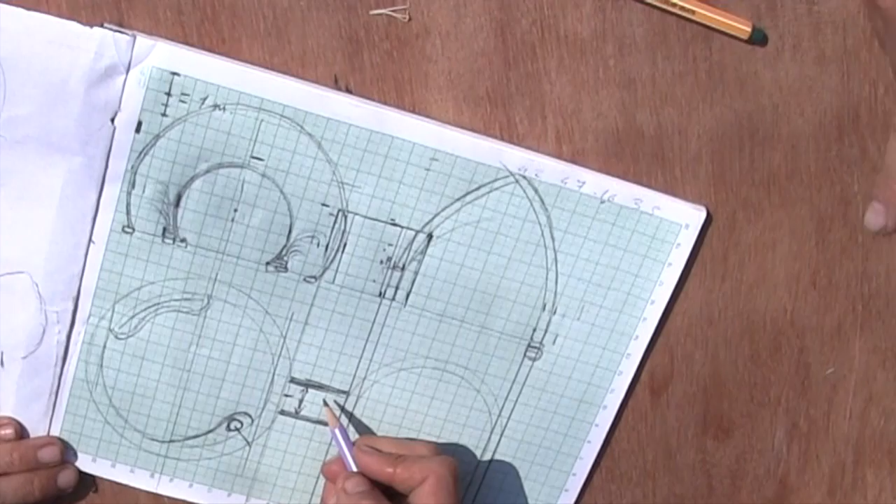No, we already have a wall here, so sometimes you talk about the width - we're gonna go with a measuring tape and just make sure that, are we 80? Maybe we're 77, and if we're 77, we ain't gonna get that box in there. Does that make sense? The inside thing comes in the most - the worst bag, the worst case.

Okay guys, do you have any questions? So basically, when you have the boxes already, you just place them there, and then you just work around them once you have the foundation. Say it again.

We have already rows, but eventually we have the boxes already placed before. So you place the boxes and you work around them. Exactly, yeah - just like we do right now with the window.

You might have difficulty putting two boxes at the door because you can't get in and out. If the walls are short you can climb over, but when the walls get taller, you'll have to climb in and out - you'll have to have a ladder to get in and get out. You're right, the boxes would be placed, you're building around the boxes. They also give you a guide - the boxes act as a guide.

Okay, so let's place this around. Otherwise, you build the boxes while you're doing the walls, and then the boxes doesn't fit. So let's put the window.

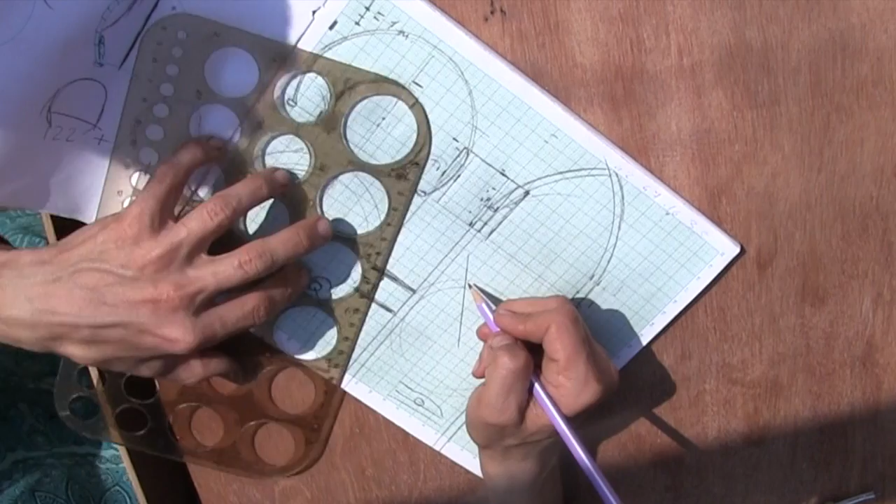I think it's more or less - the window is shooting out at this angle, more or less. And it's 95, correct? With everything, so let's call it 1.8, 1.9. So it's 95 this way and 95 that way. So that's our window box currently.

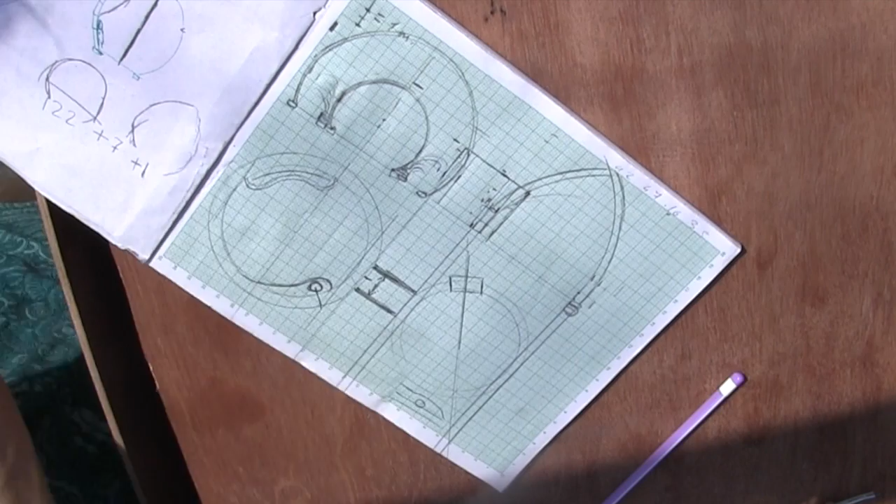If you really want to draw this now, you can take this section - that's what architects do. You can draw this view on the side view. What you'd do is take another piece of paper, and this is a good design lesson, just so you know, because you want to be able to do this even if you know nothing about CAD and 3D. You fold it nicely on this thick line here.

For 3D, would you use Rhino? Yes, I use Rhino. And then you can say, okay, there's my foundation - let's say that's your house.

And then your window is at what height? You check the height that we started at - I think it's about 40 centimeters, maybe 40 or 50. Let's just assume it's 50. Okay, so that's our height of the window. That's our box - we need to check the height.

Let me quickly grab the measuring tape. I'll be right back. Okay, so the thing is sitting at 45 - so I was almost right. And the box is 122 high. Again, you would design it here before you build, but I'm just going back from what was built. So 122, 2.4.

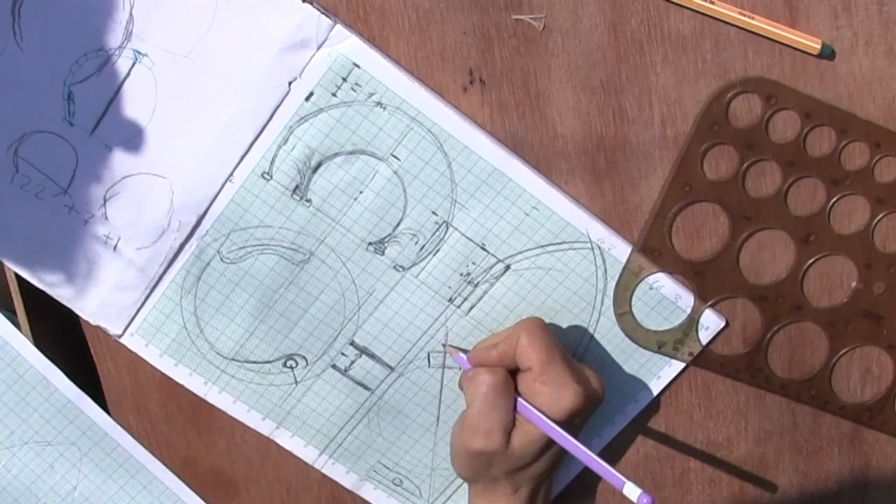So we're drawing this section - let's call it A to B. You want to see what the side of the house is going to look like. So we have 2.4, we have our thickness of bag. We're still here - we could chop it off here and make a skylight if we want.

I'm just being fancy with it. You'd shape a bit of the bag, and then put your skylight. This is when you plan it - you plan it now, okay? But we have our window, and we'll have a window sill at a slight angle to divert the water.

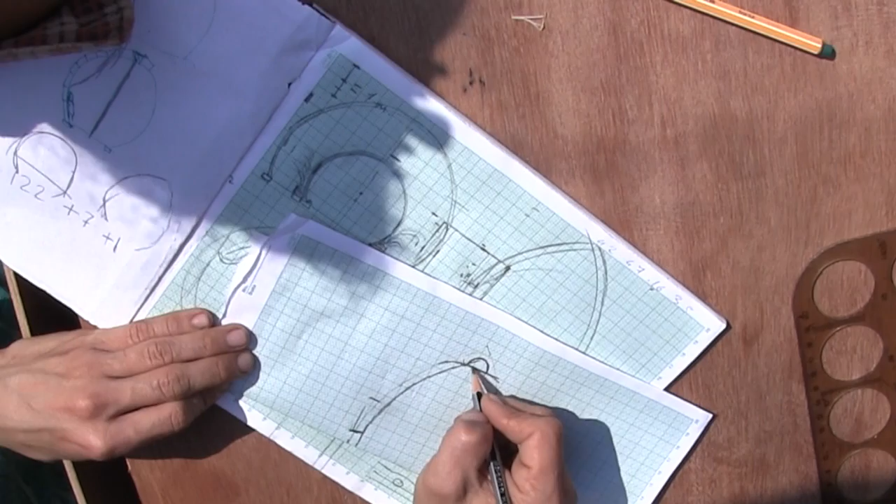How do you measure the skylight? You'd go see what's available in terms of perspex bubbles, if the bubble you want is available. They use them for things like exhibitions. Or you put a flat glass if it's not available - anybody can cut circular glass. I did that - for one dome I used circular glass, for another I used perspex. But we can't use glass here because it's going to hail.

So, this is when you plan - you'd go to the shop and say, okay, I found on Google a 50 centimeter diameter, you'd plan it in, or you found a 1.2. I used a nice 1 meter, so whatever.

What I want to show you is the window - so we've got a window here. How do you plan how deep the boxes are? You go on the outside of this, outside of that, and that tells you 55 centimeters - so you think 60, make it 60. Then you trim off the wood. You got that? Okay, so how will it look at the end?

The window will have an eyebrow, which we're going to build - it's going to be a nice little feature. It'll come in here. Well, there won't be anything here.

Just hold it - it's my dad. He walks up the hill now. I think the tractor is on the way.

We'll have an eyebrow here, and we'll have a little window sill at an angle. And that's basically what you're going to have in terms of the dome, with the box - you have the box inside, and then you're just going to...

The box, I already erased it, but how are you going to do the eyebrow then? The eyebrow you will do - I mean, I've erased it on paper, I haven't erased it in real life, it's still there. But the eyebrow you do once, don't worry, we'll do it. Yeah, the box will be there - we'll build an eyebrow around it.

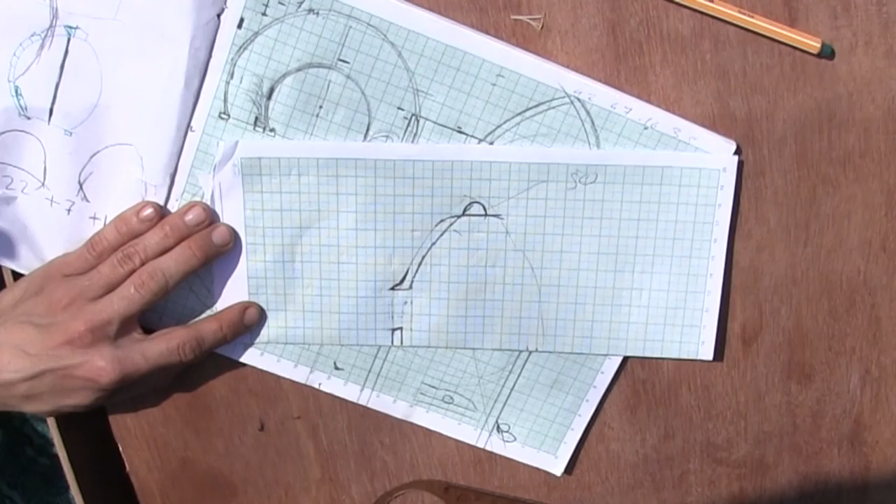That's why I need the other bags, because they're going to be hanging - lots of barbed wire, like a nice little feature. It'll look ugly as hell when we're building it, but when you're done, like that South African eyebrow was actually quite beautiful, you saw it. Yeah, it's a fat bag, the same one I used for my wall, like 70. It looked ugly when we built it - oh my god! But when you plaster it, it's like, oh no, you know. So it's very forgiving.

So you guys got it - we know now the size of the box, we know the height of the box. Now the question arises - let's say that's 80, so let's just draw the box here. Okay, so it's 80 - let's draw to scale. 1.6. Yeah, 1.6, okay.

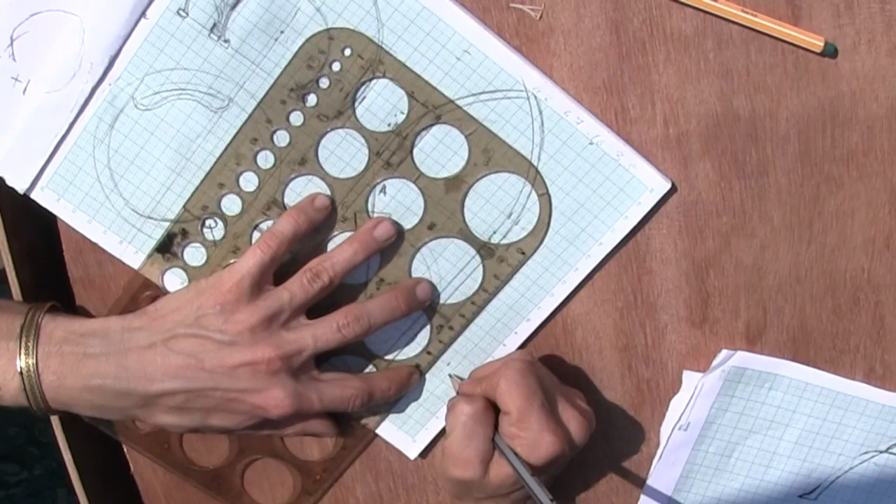We want the box how high? There's our height, there's our height. So it's 3.6. But you said we're gonna have a round thing. Yeah, we will have a round thing. So the box will be, I'm 180 already, and then we have a round thing.

No. Full height 180 - when I'm talking about this, I say full height. Then we still have aircrete bricks. I forgot to mention it's gonna have thickness here. Whether we do aircrete bricks or ferrocement, we've got 3 options here.

We've got the ferrocement option. But you said it's gonna be round, right? Actually, right now we only have one option. Unless we make this box the whole way through, then we have 2 other options. We can aircrete brick it, or we can sandbag it. With the current option, our boxes are only here.

We only have one option. An option is all of this, from the edge of this, is going to be ferrocement mesh. One option, and that's what we're doing, and that's what we will do.

Have you ever done one other question about visualization? Before I go on, I just want to finish with the box, because this is what we're going to be building.

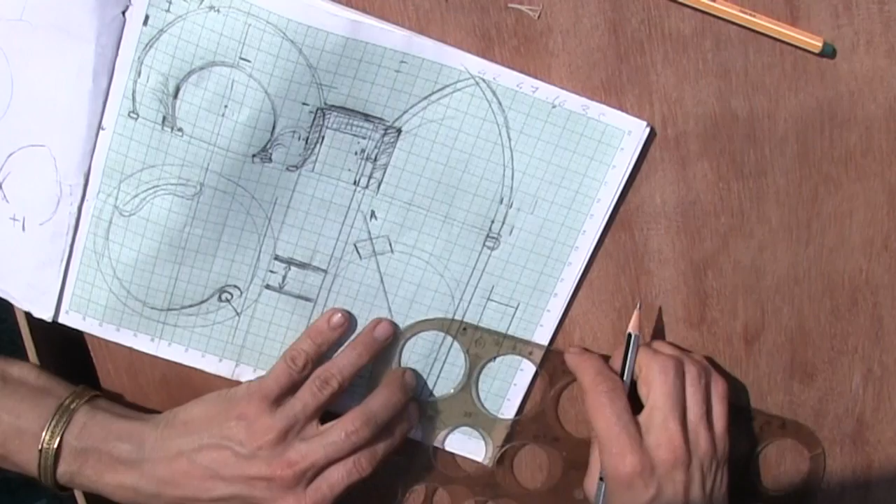Okay, so we've got 1.6, so we've got 80. 80 is our center line. 80 divided by 2 is 40. So we've got 80, so we've got 40 is our... 80 is our thing, we use our circle here.

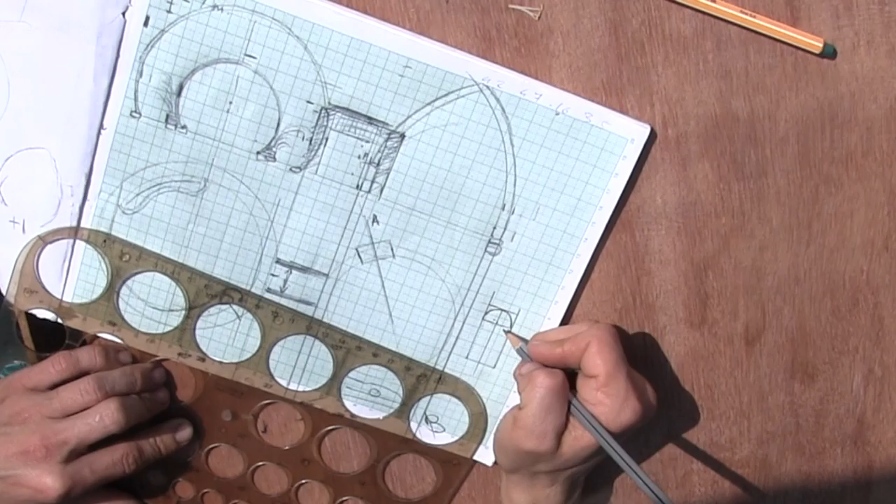Yeah, 16, so it's 8, yeah? Okay, so that will answer your question. Yes, so the whole box is 1.8 less 40, 1.4. So the height of the box is 1.4.

Let's check my mathematics, it should be 2.8 centimeters. Yeah, almost, yeah. But in terms of mathematics it's 1.4 plus 0.4, we've got 1.8 total height.

Look, we're gonna have a little bit of extra gain with these blocks, so don't worry. We'll have 183, 183. Plus we're gonna put it on wedges, which is gonna give us another 3, 186.

By the time we're done, I think if we do another, we're gonna plan more, obviously we have to think about taller people, right? You can put the same box, just on bigger concrete blocks when you're building.

Because if you have 140 here, basically just one person can walk through, and can walk through only in the very middle, because here it's gonna be already one. But that's where you walk - there's a tunnel this wide. Why would you walk anywhere to the side of the tunnel?

Look, I don't know, maybe you have something standing in a tunnel, right? Like, not in this tunnel, not for this size dome. When you're doing a bigger thing, plan a bigger thing, I would go for a standard door.

Standard door from the shop, however it looks. Then you do a little half moon thing. Is a half moon thing really needed? Yes, unless you do a concrete beam on top.

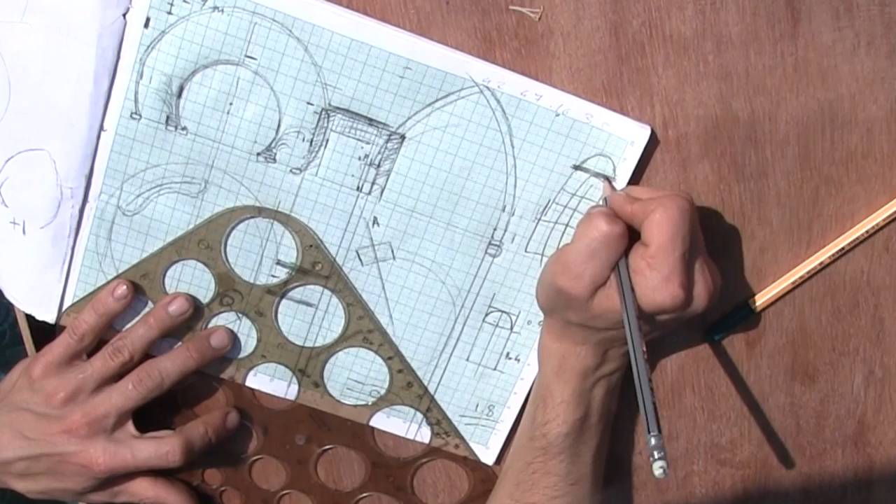Which you can do with sandbags, but that's another story. In essence, you hammer rebar into the side, you add more cement into the mix. You've got the bag, you've got your wooden shape lying strong on top of the door. You put your sandbag flat on top, and then you hammer 2 sticks of rebar into it. I don't teach it because I like the little round thing, but you can.

You can, and then you can have it straight, but then you need rebar so it won't collapse. Or you go to the shop and get a concrete lintel. Lintel - what are they called? You know what I'm talking about, they put them above doors. Those little ones, they look quite rough, but yeah.

Okay, so for this size dome, this is good, and this box you'll be able to use for many other domes. Do we have any more questions on the design work? We basically drew the whole house from scratch.

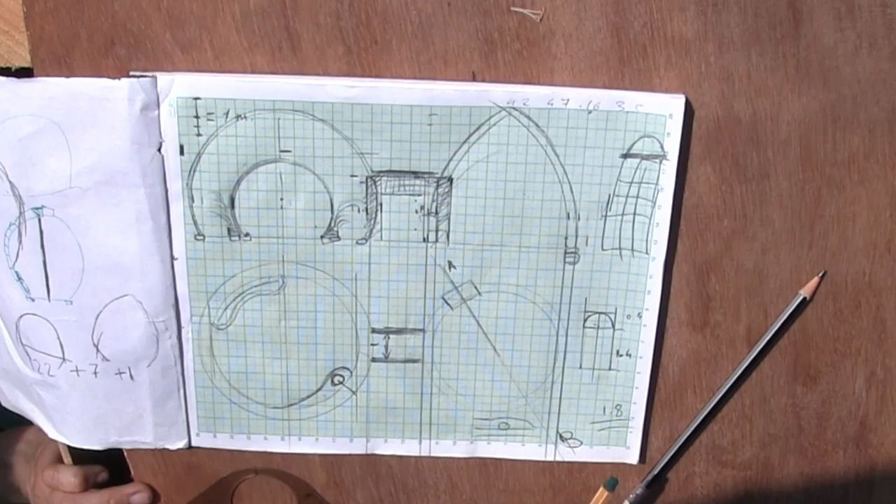Did you do any visualization with Cinema 4D already? No, never. Okay, if anybody wants to add assistance, I'm more than grateful.

I just wanted to show you, excuse my look, but yeah, who needs an architect? Here's a quick sketch - we did it the first day of the workshop. We didn't even have a sketch, I just drew a quick sketch to scale on the first day, and here it is.

Tomorrow is the 12th day of the build, only 12 days, and we got it. You don't need an architect - just a quick sketch, side view, top view, and that's it. Job done.